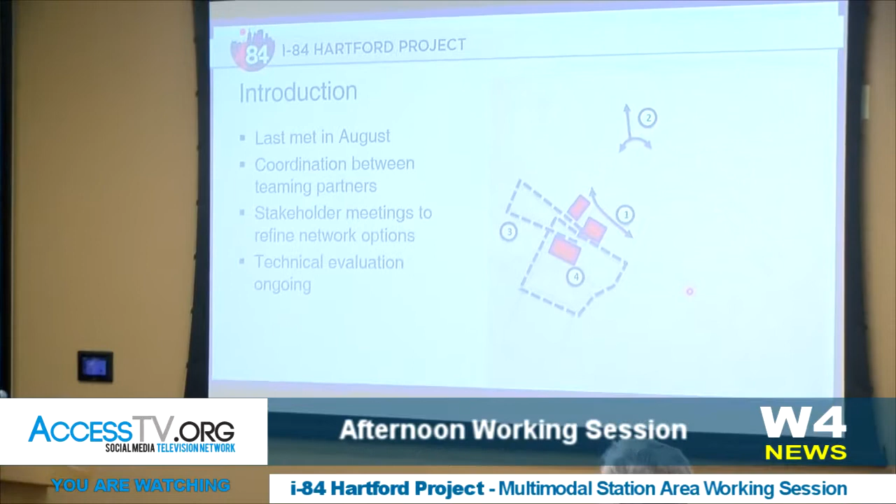Tom's going to tell you about these 4 focus areas in the network, and there's some broader urban design implications, but those red squares are also roughly where the stations are being targeted - a couple north of Asylum, 1 south of Asylum. And we're going to look at the pros and cons of those and how they relate to the overall street network, how they relate to the pedestrian experience, to the development opportunities moving forward.

So there's a lot of moving pieces, bear with us. In fact, many of the graphics you're going to see are still in very preliminary form. That's a result of this iterative nature of planning. But you're kind of here looking over our shoulder at this point. We want to make sure we get it right before we really commit a lot of design work to the final plans.

So Tom and I are going to tag team a series of slides here as we talk about the road network in the eastern area of the project. What I've got up on the screen is what we found to be the best performing of those 3 interchange options as it relates to traffic operations and safety, both on I-84 and the local streets. So many of the things we talked about today, we've really focused on how to improve that, just to lay the groundwork for some of the future conversations.

I-84 is depicted along this path. This is the eastern area of our project area. So this is Broad Street here, Farmington Avenue, Asylum. The highway comes around here underneath High Street and Ann Streets, and this is kind of that depressed section that leads into the Hartford Tunnel in this area.

So the proposed lowered highway alternative would be relocated about 250 feet to the west. The existing highway would be about here, so it would be shifted just a little bit to the west to help address this horizontal curve here, which doesn't meet some of our modern design standards, and for a safety improvement as well as for constructability.

And then as part of that lowered highway alternative, you see this red line work here illustrates the relocated railroad. So today the railroad comes underneath I-84, wraps around Bushnell Park. Union Station would be right about here, and then the railroad comes under I-84 again off to the north.

So this lowered highway alternative does rely on this relocation of the railroad to stay on this north or west side of the highway. And then this option calls for eastbound ramps that would come to a new street between Capitol Avenue and Asylum, and then westbound ramps to a realigned Cogswell Street. Today, Cogswell comes up here. We'd realign it here to connect in where Edwards is over towards Walnut.

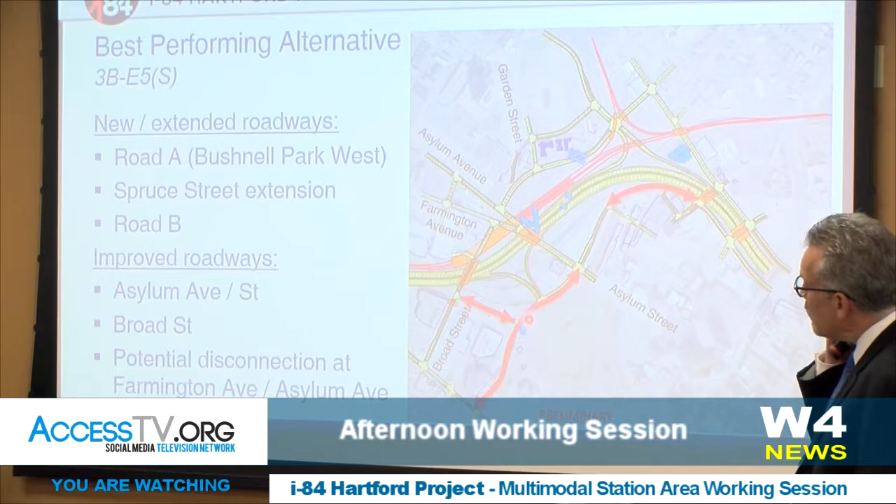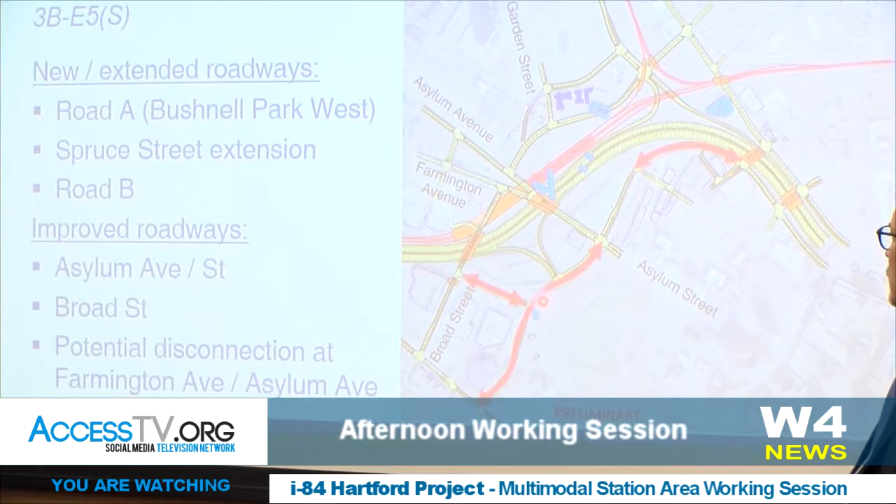So in addition to those new or extended roadways, we'd be looking at improvements to both Asylum and Broad Street. In all likelihood, the traffic operations will be improved, hopefully in a manner that we can create a more walkable, bikeable, and a better situation for transit users.

We do show with this option the disconnection of Broad Street between Farmington and Asylum. We've recognized over some recent meetings that that's a bit of a talking point, and we brought some options to the table that we'll discuss that keep that open. So that'll be something we talk about moving forward.

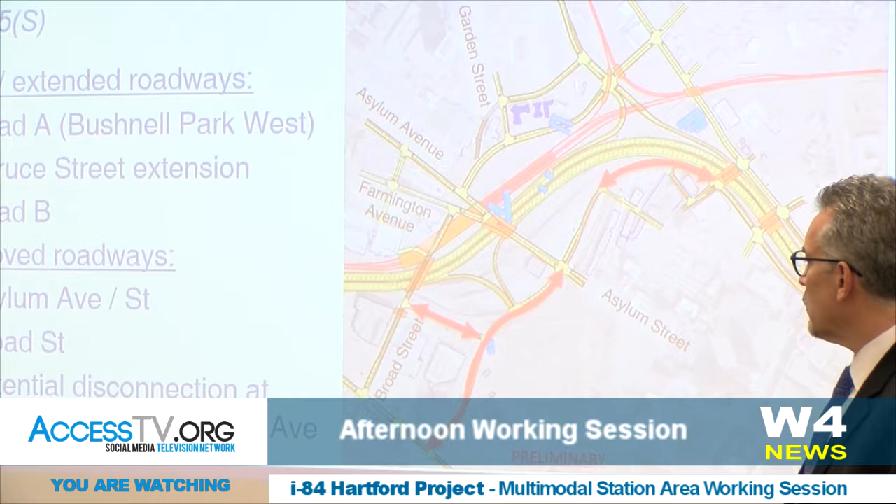So I'm going to turn it over to Tom to talk a little bit about his role here working with the city and what they've looked at doing to improve this alternative. So thank you, Casey.

One of the things that we're trying to do is balance the modification to I-84 with the connectivity of downtown and Asylum Hill, bringing together those two neighborhoods around this new piece, two new pieces, of infrastructure.

And as part of looking at the goals and objectives, and in talking with the city, we highlighted some of the objectives that we thought were extremely important. Obviously, the notion of trying to make improved connections, both east-west and north-south, and using those new connections to really establish a strong sense of place.

This is an area that sort of sits between two pieces of the city, and we want it to all feel like one connected city. So we need to create this great sense of place in this area.

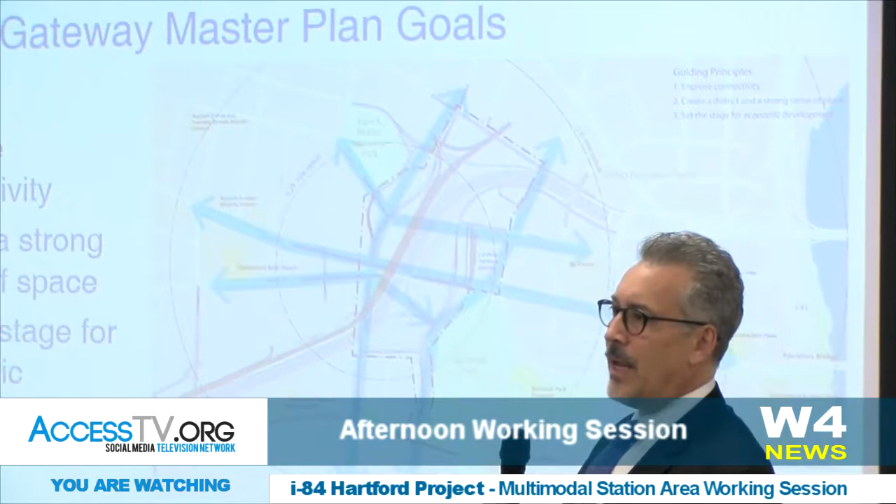As we bring these new pieces of infrastructure in, we need to build the community around it. And really, in so doing, create this opportunity to enhance and improve economic opportunity in the area, create places that can be seen as economic generators, again, building out the center of the city.

And so keeping those in mind, we've been working with the team to try to look at the preferred alternative that Casey just explained and begin to see how some of these opportunities illustrate themselves and can be incorporated into the design. So if you go to, actually I can go to the next slide.

So I want to walk through four focus areas. The first two are ones that we feel real strong about, that we've done a significant amount of work on and seen as improvements that really can be tied in to the preferred alternative. And the third and fourth are a little more open, still undergoing a lot of analysis, and certainly all four, we want your input, but that's kind of the stage we're at with all four of these.

So the first is this idea of a Garden Street connection. We've looked a lot at the area to the north of Asylum and how we might be able to bring in more connectivity in that area.

The second is really looking at the alignment where the off-ramps come in the north, and coming up with a way to push traffic in the right way through that condition. The third is looking at the Trident area, and a couple of options for how to move traffic through that area, given a lot of the community input we've received.

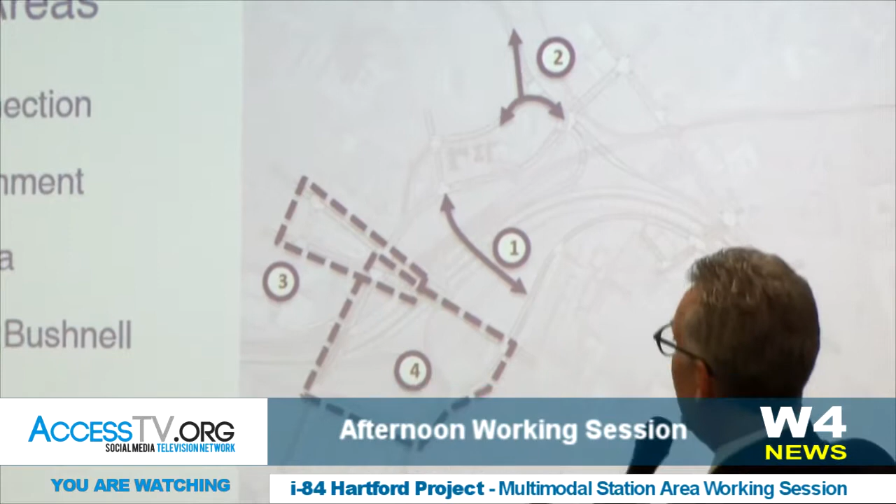And the fourth is focusing, like in the north, on what we call the South Quadrant, that area where we have Bushnell Park West Road coming in. How do we create that as a real active part of the city? How do we create that as a real entry point, a gateway, and also a great place around Bushnell Park?

So we're just going to walk through each of these one by one and talk through some of the improvements that we're considering.

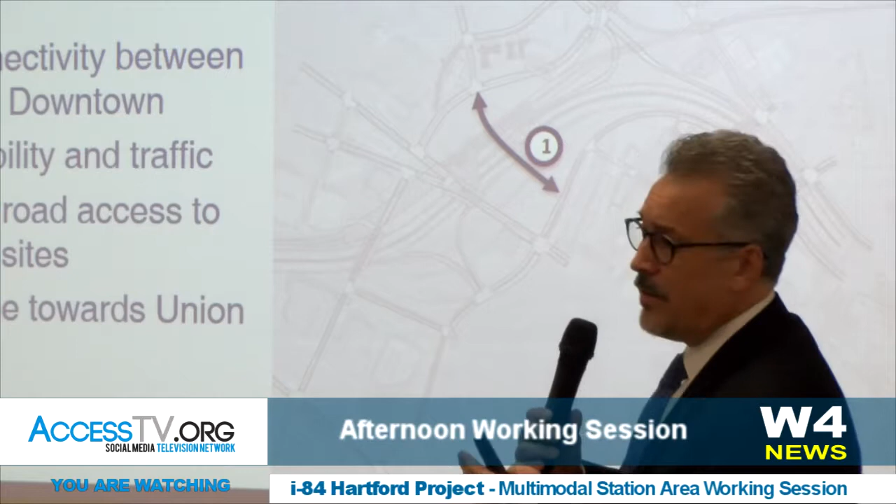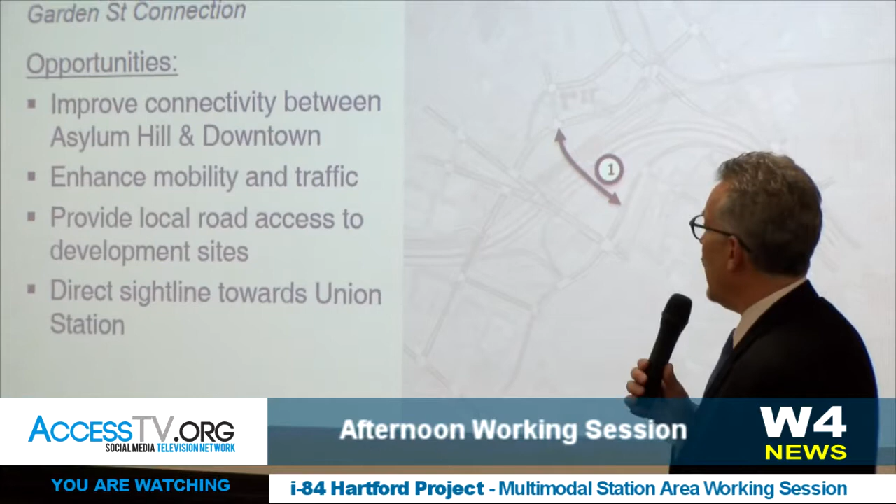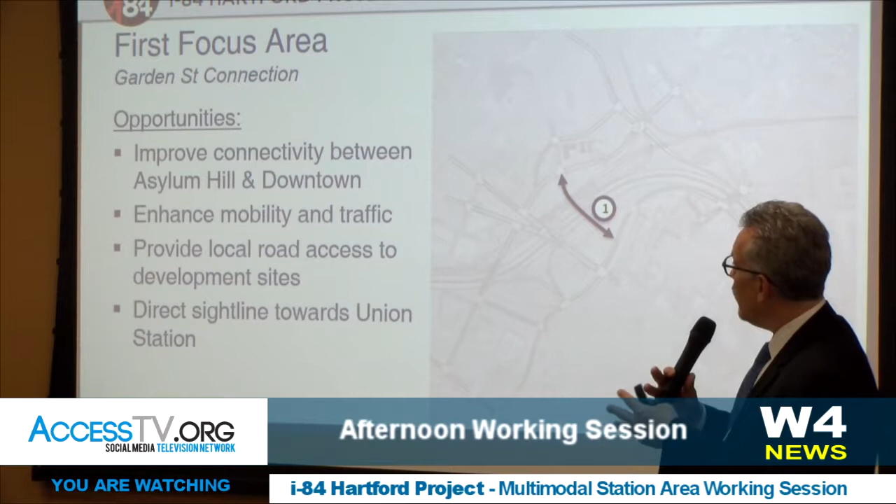First and foremost, this idea of connecting Asylum Hill back into the community on more streets than just Asylum Street downtown. Between Asylum and Walnut, there's really no east-west connection, and we wanted to figure out a way to do that. We think Garden Street is a real opportunity. It's a steep street, but it creates a great entry point directly into the current Union Station location. It sets up the ability to break the network into developable sites, increases sight lines, and we think it enhances mobility and traffic conditions.

And Casey, maybe you could talk through some of what we see in that regard. Absolutely, thanks Tom. First of all, it adds redundancy to the network, and what that does is allow us to alleviate some of the pinch points in the traffic network, particularly the struggles we see every day in the Trident area. This adds some redundancy and takes some people off Asylum and Farmington.

Now it's a relatively obvious east-west connection, but we're seeing benefits also from a north-south perspective. Somebody on Capitol Avenue could come north along that new Bushnell Park West, get to Asylum, and then use that as a way to get between Frog Hollow to the south and Asylum Hill to the north without having to pass through that really congested Trident area.

Now, Tom mentioned the potential grade, the steepness of the roadway. It is going up a hill. It would be about the same grade as Asylum Street is today, about 7%. That's just a little hair steeper than the existing Myrtle Street connection, which comes down under the highway today.

And then what we're looking at now is what that means for the ground in front of Union Station. In order to achieve that, we'd raise Spruce Street about 4 feet, right where my red dot is. We'd come down to meet where Asylum is today with no change, and meet where Church Street is with no change. So we're developing additional graphics to help illustrate that, and I'll be working with the State Historic Preservation Office as we look to document any potential visual impacts to the historic Union Station.

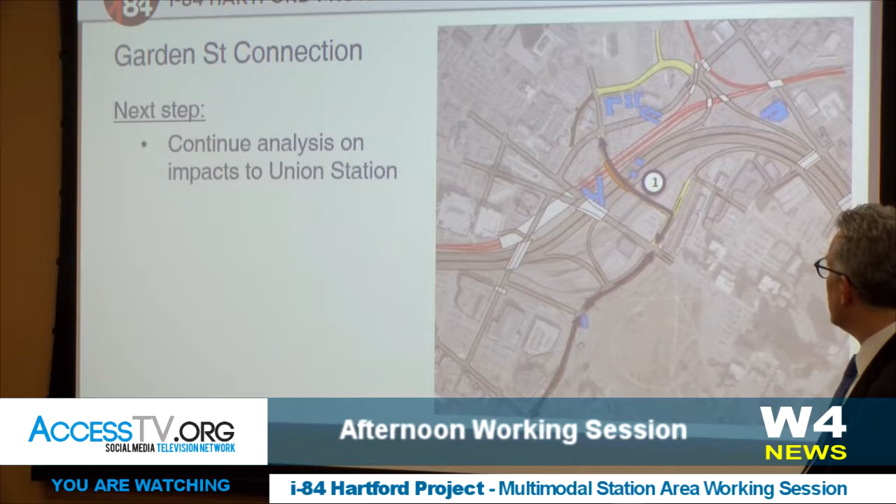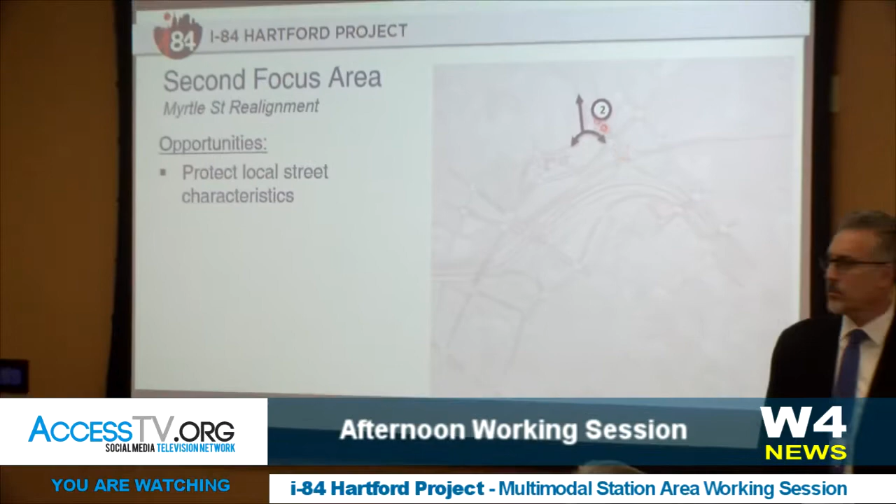And as Tom mentioned, that second focus area is up in the vicinity of Myrtle Street. Nick, can you pull up that map? It kind of doesn't show it on this map, but this alternative had led the ramp traffic up Fraser Place, which really leads you into a more residential neighborhood in Asylum Hill.

Now with a major destination on the other side of that, St. Francis Hospital, that was something some of the folks in the neighborhood were a little concerned about, and something we've looked at a few different ways to try and help mitigate.

And ultimately, we kind of stumbled across what we find to be a relatively simple solution, where instead of previously having Fraser Place come in straight to the ramps, we now take Myrtle Street and essentially wrap it around. So if you came off the ramps and went straight, you'd follow this curve around.

And ultimately, you'd take Myrtle Street to Garden Street, and Collins Street takes you up to St. Francis Hospital just off the page. That's a little bit more similar to traffic patterns that we have today, and it kind of keeps people out of those neighborhoods. This also helps traffic operations at this series of intersections, because it reduces the number of people who have to come off the ramps and turn left. So it's something we found to be a really positive introduction to this alternative.

And essentially these two things we're kind of viewing now as part of the alternative as we move forward. And then with that, Tom is going to talk about the first of those areas that's still a little bit up in the air.

Casey asked a quick question: would there be a traffic signal at the intersection of Fraser and Myrtle? The answer that Nick provided would be no. So the benefit is the traffic is just free flowing now as opposed to being forced up Fraser? Yeah, okay, thanks.

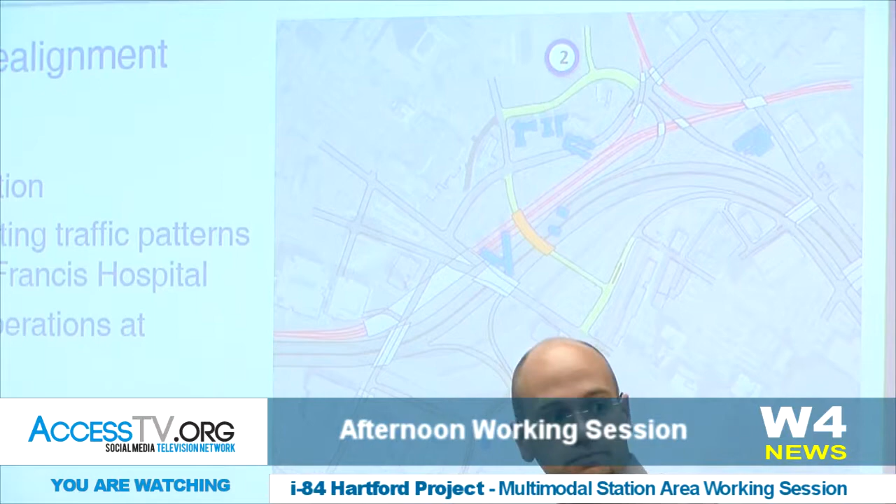So I think what I was leaning towards was turning you over to Tom to talk about the first of our areas where we're still really up in the air and contemplating several options. So we have another question.

Casey or Jackie asked: back up to the grades - you were going to talk about the grades, they're similar to what Asylum Street is? Yeah, that's right. In the winter, which is the only time grades really matter, there are times when buses cannot get up Asylum Street between Spruce Street and that hill there that goes under the highway. So why would you build another street with that kind of grade? I don't understand that. Sure - I mean, the truth of it is it's going up a hill. It has to start one place and get to a set elevation at the top.

We've played around with a couple different scenarios where if we make it a little less steep, we really have to pull the elevation of this roadway, which is Spruce Street in front of Union Station, up. So what we're trying to do is balance that. I wouldn't necessarily say it's set in stone the way we have it now. I certainly value the input of your comment. We thought that was kind of a fair balance because it set it equal with a neighboring city street, but it's something we can look at.

We could potentially make the grade a little bit less if we raise the elevation of Spruce Street right here in front of Union Station. So that's something we'll look at.

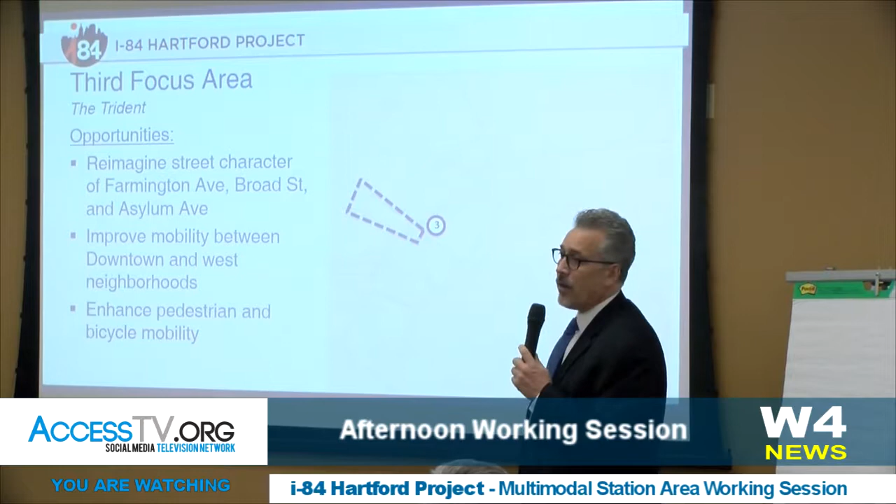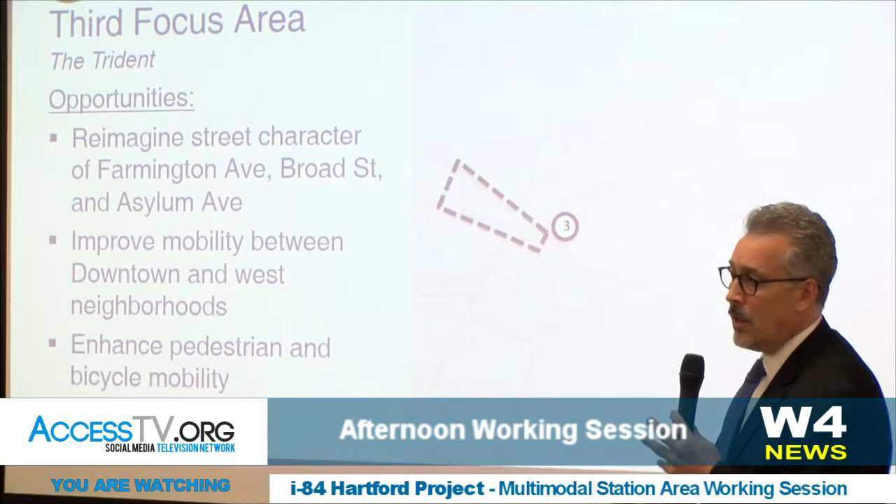Under the preferred scenario, the optimal manner for which to move traffic through the area found that if you separated Broad and Cogswell in this area, that was a way to move traffic through the neighborhood in the most efficient and optimal manner. But we have heard that there are a lot of concerns about bike and pedestrian connectivity in that area, that there's a real strong desire to have Cogswell and Broad connected. So what can we do to try to balance what really are a number of different trade-offs associated with this area and try to get this right?

So we went back to the drawing board and continued to look at the area. We obviously want to meet the goals we were shooting for of enhancing mobility, creating connectivity, generating a great sense of place. We also want to make sure we don't have any fatal flaws in the traffic network. We don't want queuing back onto the freeway. We don't want intersections that have a full cycle delay or more.

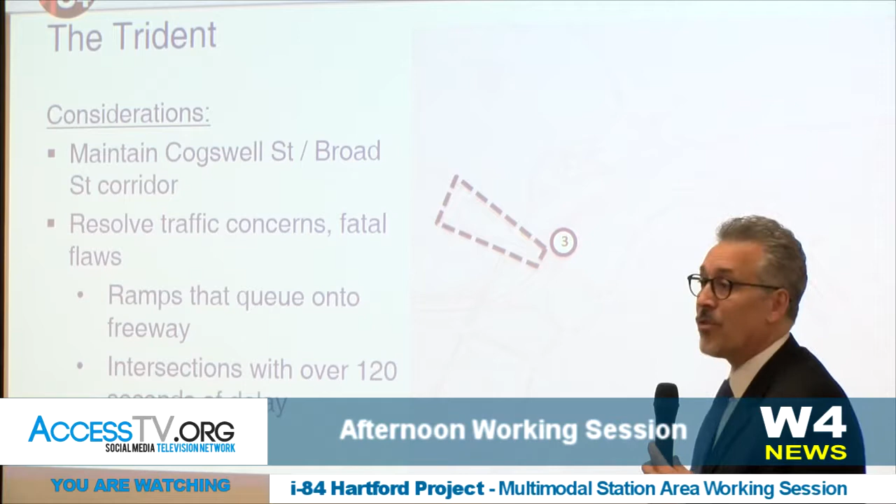Balancing those different options, we've really looked at 4 alternatives that we'd like to present today and get your reaction to. The first would be the original we presented last time, which is what we call discontinuous Broad Street. But we also want to look at maybe there's a way to not have Farmington extend directly into Asylum, but bring Farmington down to Broad. There's the idea of converting that whole section into a roundabout. And then a fourth, which we call the Western Shift, which I'll explain when we show you the drawings.

So this is the first, the discontinuous Broad Street. This was the one that became the preferred option because of the traffic performance, and it provided the best opportunity for keeping the streets around the Trident at a more pedestrian scale, less lanes to accommodate, easier to traverse, things of that nature. All very important to trying to create a balance between automobile and pedestrian in the area.

Yeah, thanks, Tom. So just to speak to that, we feel that does end up adding benefits also to the bicyclists, the pedestrians and the transit users in the area, and that the roadways feel a little bit less auto-dominated. One of the things I'd say too, I just enlarged this arrow here to demonstrate that we would look to keep a bicyclist and pedestrian connection through where Broad Street is today. So when we talk about it being discontinuous, that's really just for cars or buses.

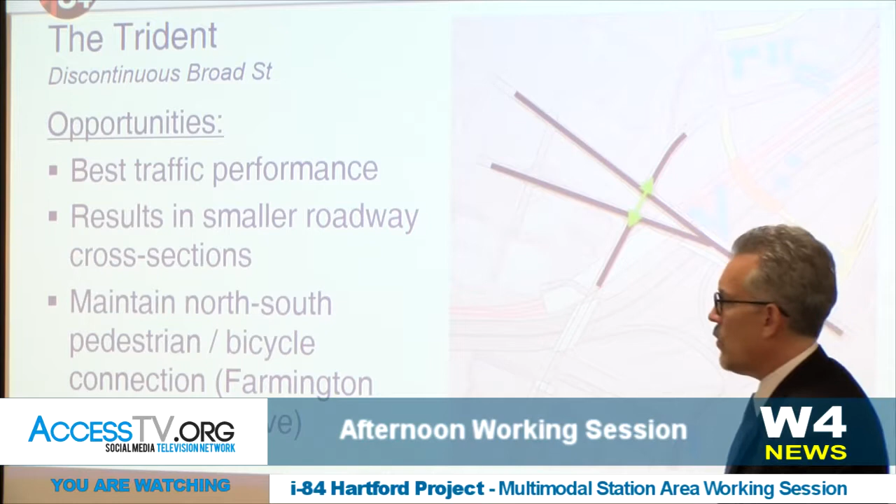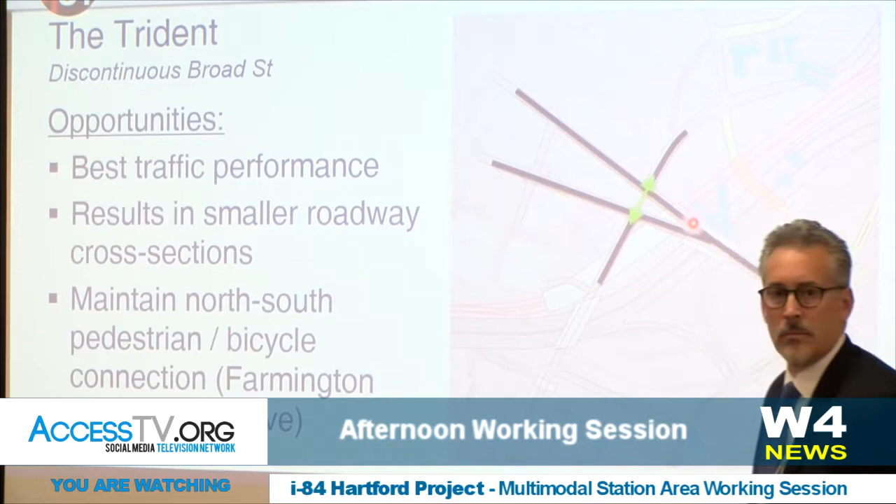Sure. One of the reasons the Trident set of intersections — we're talking about the intersection of Asylum and Cogswell, the intersection of Farmington and Broad, and where Asylum and Farmington come together — have so much trouble operating well is they're really just 3 intersections that are too close together, and there's a lot of traffic trying to come through both up Asylum and up Farmington to get in towards downtown, and then they're conflicting with a big movement of people today who use Broad Street north-south, not just between neighborhoods, but also to get to the on-ramp we have today on Broad Street. Now, one of the changes you'd see under this lowered highway alternative is by moving the eastbound on-ramp over towards Bushnell Park West, that does change those travel patterns somewhat, and it does reduce the demand to go north-south along Broad Street. So it's really just then left at that neighborhood level traffic.

When we were looking at all these different options, Nick and I have a far more detailed presentation if you're interested after, we could walk you through. One thing we tried here is we went out and counted cars, tracked where they went through the area, and noticed how few were really taking that north-south connection. That's what led us to try this. The results, we were even a little surprised at how well it operated. It's almost remarkable how much better it operates than many of the other options on the table.

There would still be intersections there with pedestrian signalization so that bikes and peds could cross efficiently, right? Absolutely, and there'd be full bicyclist and pedestrian mobility at each of these two intersections, as well as green arrows denoting movement between them on the parcel of land in between.

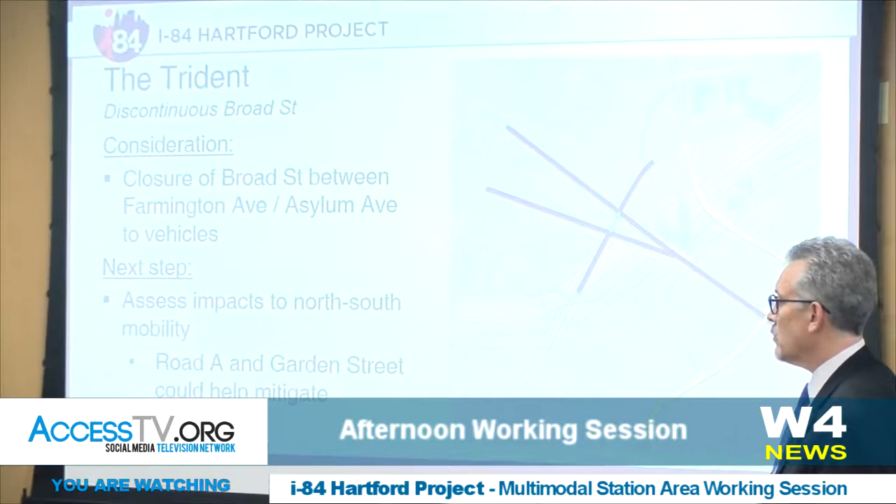So I can either pause here if there's any questions or comments, or I can - oh, here we go. I just want to confirm one thing: you're saying that the green arrows represent bike and pedestrian connection, but not cars. That's correct.

Just curious, since you've taken a look at that, do you know approximately how much longer that would be than what currently exists? It would depend slightly on where your origin on Capitol was and where east-west you were going, but the distance between Broad and this road here is about 1,000 feet. So if you had to come down to this road and then back up, it'd be about 2,000 feet - that's about half a mile.

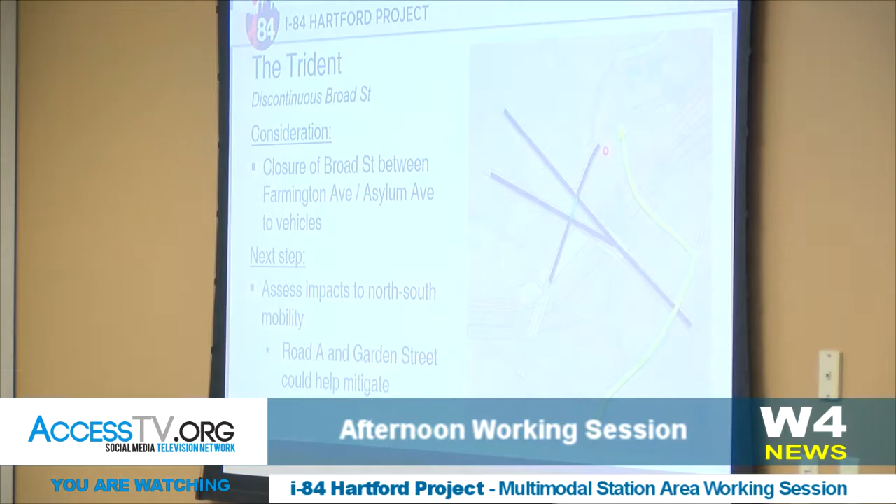Okay, but then of course, depending on how much faster it is. Yeah, we see it as probably being more efficient, these intersections operating more efficiently. Plus, if your destination was to the east, if you were over by the Bushnell or the Capitol, it could actually be shorter than having to go all the way to Broad - because remember, today there's no road here where this Bushnell Park West is shown.

Right. What about anybody headed west? Is there any other option other than Sigourney? It would be Sigourney, or you could take Broad Street up and then use Asylum Place around if you didn't want to go all the way over to that Bushnell Park West. Okay, thank you.

So you're saying that most of the cars that come down going east on Asylum and that would turn onto Broad Street - those are vehicles that are mainly going to get on the highway, is that? So for the cars coming down Asylum and then turning right on Broad - no, you're on Farm, that one - oh sorry, taking that right, they're going where generally? I'm going to let Nick answer that over there.

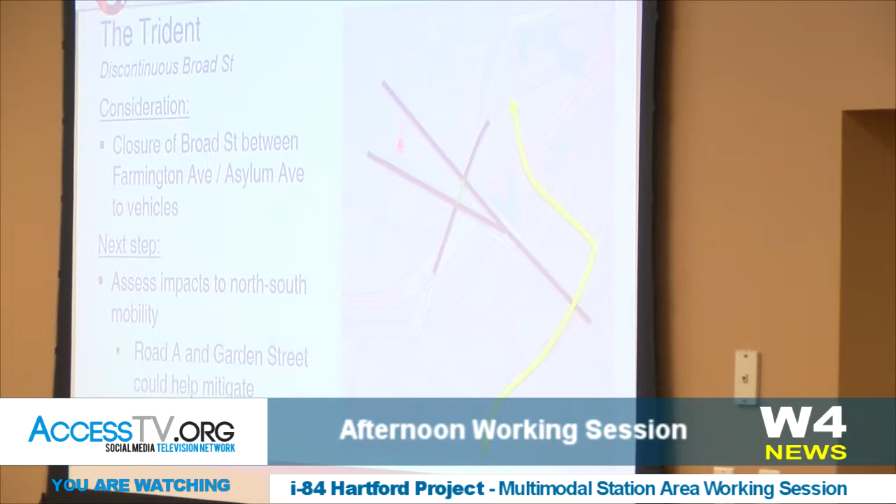Sure, in the PM peak we have a lot of them getting onto I-84 eastbound on the Broad Street on-ramp. But throughout the day we also have cars going down to Capitol, and it's not the major movement, but there's still a few hundred of them. They do have several more options in this case - for example, they could take Asylum Place right here, take a right and a left on Farmington and still go down Broad, or they could continue and take the new road, the Bushnell Park West or Road A. So they still have options, though it is a bit of a diversion from their normal route. Okay.

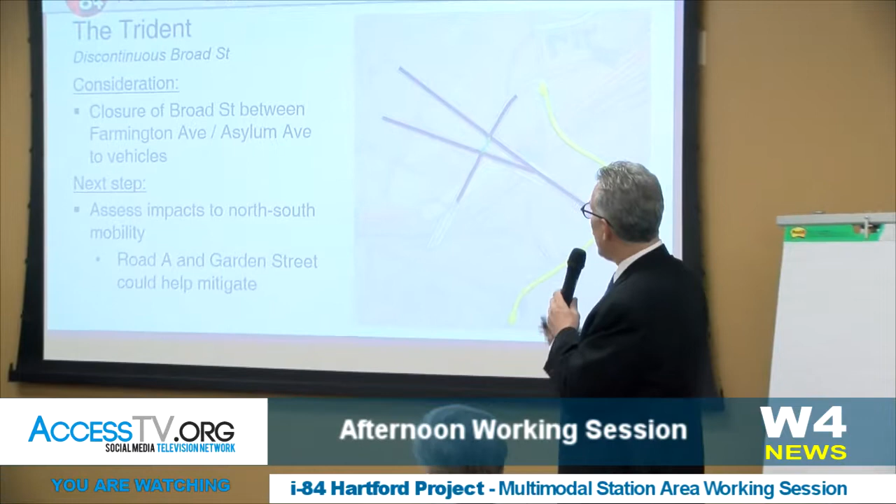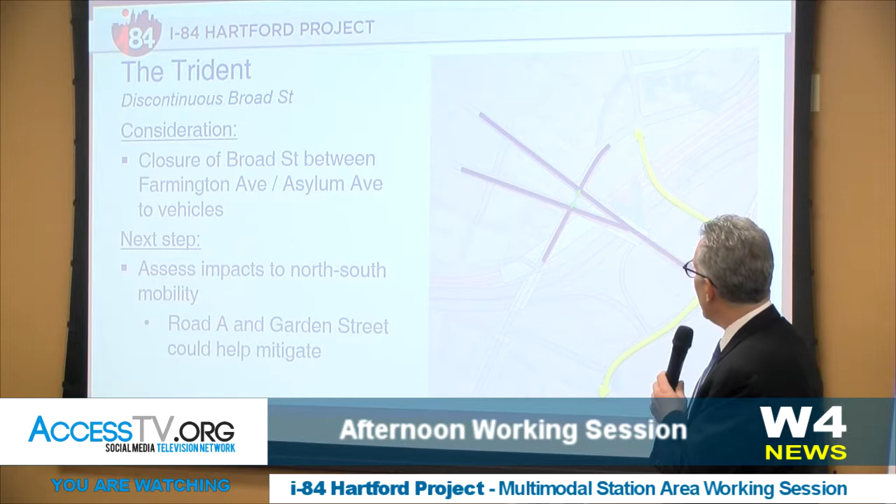Thinking about the Trident area, you can't really think about it in exclusion to the rest of the network. We're trying to think about ways to enhance and create as much mobility as possible, create opportunities for building out the network. One thing we found very intriguing was, if we really have an issue with those three intersections being so close together, is there a way we might realign the roadway network, create an extension of Farmington, bring it down to this new Bushnell Park West roadway corridor, and create something that solves our traffic considerations but also begins to build a network to the south.

That's compelling in a lot of ways, because it creates this featured development space right on Bushnell Park, one Farmington Avenue. It doesn't necessarily solve all the problems with the Trident, though. I think the idea is compelling, but we still have to think about whether we're achieving all the goals optimally with all the trade-offs, and whether there are other ways to build out this network that also make the Trident work effectively.

We have been looking very seriously at some way to consider extending Farmington to the south. To do that, one key issue would be sliding the ramping system further south to allow Farmington to come down and create the kind of block system that would work well. There are a lot of challenges associated with that from a traffic operations standpoint and a queuing standpoint, and we have to explore that more as we think about these connections to see if it can even work.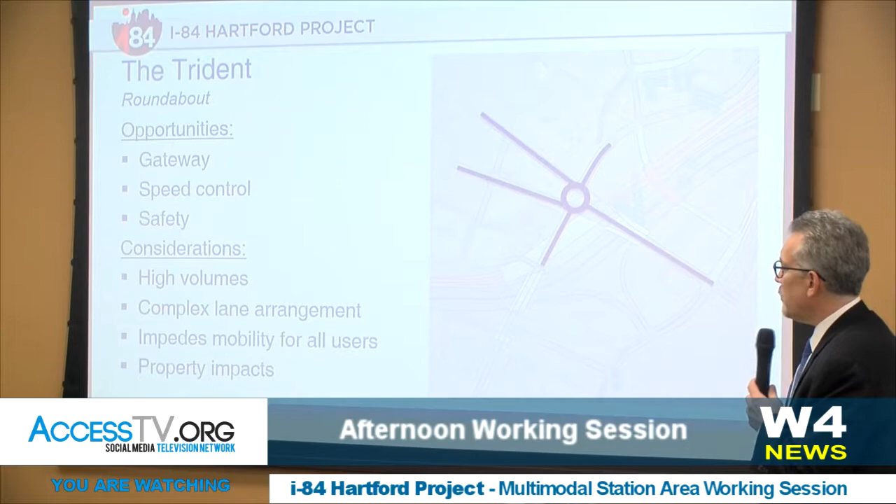Thanks, Tom. The question that came up earlier, and Nick's response, was a great one — how modern roundabouts have started to be used not just as a traffic operations measure, but as a way to be a gateway to a place. There have been studies showing safety reductions compared with signalized intersections, and they're definitely a potential speed control feature — you have to slow your vehicle down to traverse the roundabout. So we really did understand why people were asking if a roundabout would work at this series of intersections.

When we looked at introducing a single-lane traditional modern roundabout, we looked at the volumes, and they're about double the maximum a single-lane roundabout can hold. So when we tested that, it really just didn't work — it created congestion and backlog throughout the network.

So we then looked at whether we could add some lanes at key locations to make it work. We started doing that, and you're about to see the results — it kind of looks a little bit like some sort of sea creature.

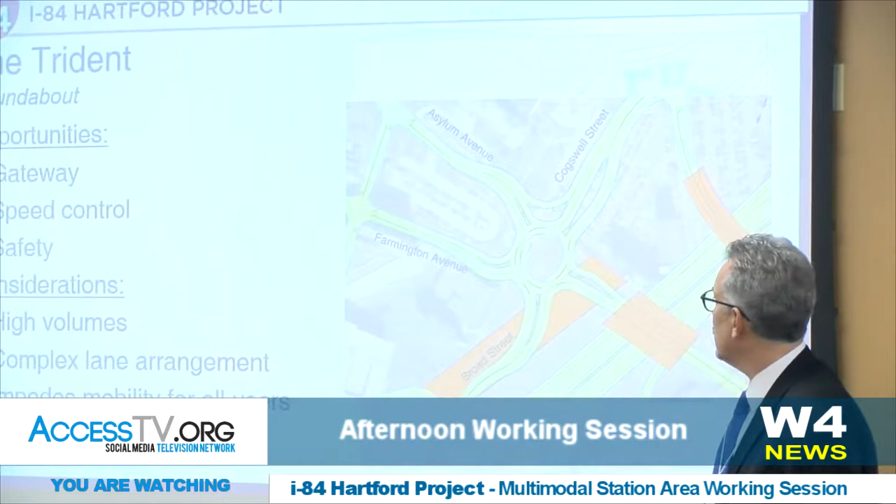It would be extremely complex. It's probably very hard looking at this top-down photo to understand how it would work and operate, and as a driver approaching this, it would be extremely complex as well. It would be very tough as a pedestrian to try and cross these approaches. The size would impact the 4F park areas on either side of Broad Street that it would expand into. So ultimately, we felt that this location is not the best in the project area for a roundabout, but we're going to continue investigating other intersections to see if they could be more appropriate locations for that.

This is kind of fortunate in a way, because the idea of creating a roundabout there had a lot of really good qualities associated with it, and it engendered a lot of creative thinking on the part of the team.

All right, so if this isn't working, what can we do? How can we try to fix that issue? How can we try to make the system work? We began to come up with this new concept, which I think is interesting and very compelling, to shift the intersection of Asylum and Farmington further west. And is there a possibility by shifting that west—there are implications associated with it that we have to go through.

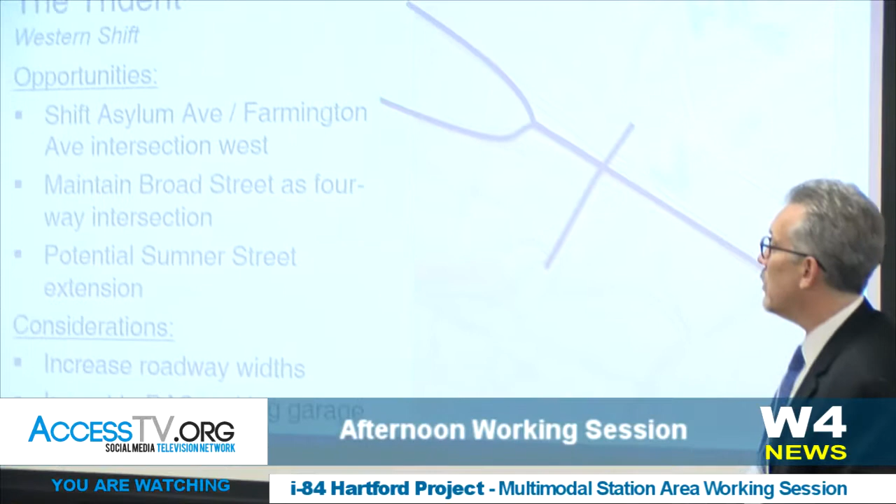Yeah, I just wanted to clarify. I said roundabouts create a safety reduction, which is in fact literally the opposite of what I meant to say—that they usually create crash reductions. So it's a good thing.

And Tom, just point out where the original intersection is on that and where the new intersection is, so it's clear to everybody. So my pointer's not as good as Casey's, so he may do a better job. But the current Asylum Farmington intersection is where Casey's pointer is right now, and what we're trying to do is shift it as far west as reasonably possible. It does impact the DAS parking garage, but it separates it from what would then be the potential for a connection across Broad and Cogswell. We know that people see that as a very important connection.

Can we create a scenario there where these two intersections work well? It's going to increase roadway widths in this area, but it's something that's worth exploring, and it does open up some possibilities for thinking about how that then impacts creating the network elsewhere. So this is something that was really brought about by the exchange we had at the last session with all of you, thinking: if we know these are the goals, how can we begin to achieve those goals in maybe some other creative ways?

One of the things that was our inspiration for this was the concept from a couple sessions ago, the discontinuous Broad Street, and seeing how well it worked when that V shape was created separate from a north-south movement. So what we've done is see how that played out. We did our preliminary traffic analysis. It does push a lot of traffic, once these two combine, through this intersection with Broad Street.

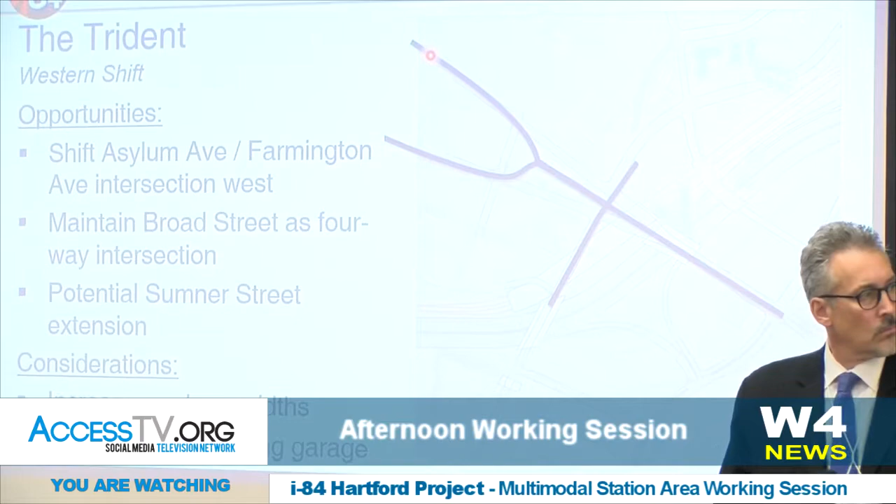The other thing we're looking at to try to mitigate for that is there's a missing roadway just off the page here—Nick, I don't know if you can pan to that too. So basically, Sumner Street comes down and does not extend all the way to Farmington. Understanding that would bring property impacts into play, we've looked at some scenarios to see whether that would help. There's the potential it could help us reduce the width we need on this critical segment, potentially to 6 lanes instead of 7, which would be a step in the right direction.

Hey Casey, forgive me, I'm over here. You're good. Let me be the one to ask the stupid question, because it looks to me like maybe we're just moving the trident to the west and we're going to have the same situation. Is that not the case, or why is this superior to where the current convergence of Farmington and Asylum comes in today? That's a good question, yeah.

So the reason to look at it is because it allows for the provision of this north-south connection. It keeps Broad Street continuous in the way that it is today. The traffic operations would be a little bit worse—they wouldn't be, at this point, what we've determined to be a fatal flaw according to the criteria we've set up, but they would operate a little bit worse. We'd be a little concerned about traffic queuing, just because there's so much traffic trying to move east, particularly during the afternoon peak period—worse conditions than our discontinuous Broad Street option, which is the first one we showed you. It would, in all likelihood, be slightly better than today.

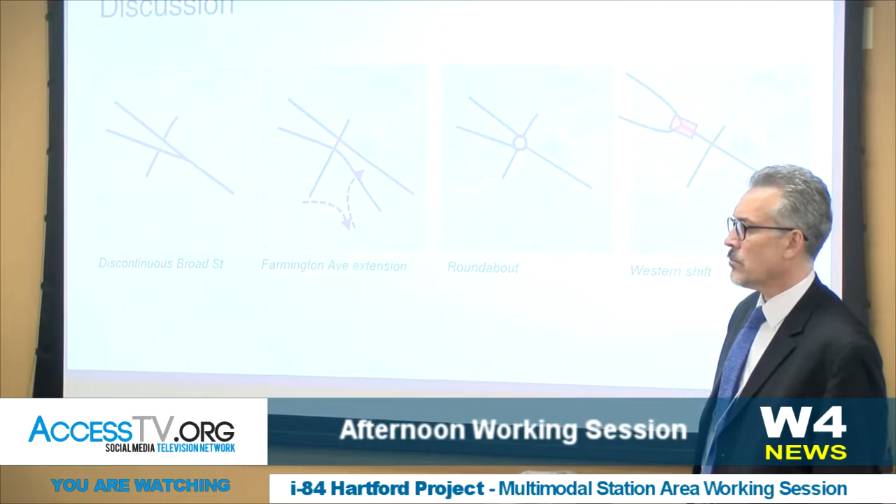Okay, well, we've got four basic options with permutations of each, and quite frankly there's a lot of trade-offs. We're still trying to understand what those trade-offs are. We aren't looking to necessarily choose a solution tonight, but we want to keep working on these and truly understand the pros and cons of each, so we encourage your continued feedback. In fact, after this session, we have much more detailed drawings of these — if anybody wants to stay and really get into the weeds with us, we'd be more than happy to do that. But just because we don't have this particular piece solved doesn't mean we should stop thinking about the broader implications of how to create better spaces in Hartford.

And remember, this is just sub-area 3 that we're looking at. There are many different ideas for sub-area 3, the Trident.

I want to advance the slide and get into sub-area 4, because there's a real opportunity here to look at what we can do around this interchange location, how to activate the space a little better, recognizing there are ramp structures coming up, and how to make better pedestrian streets, more human scale environments, and tee up development opportunities for the city of Hartford. The Trident and this area work hand in hand, and some things could potentially be advanced independent of whatever Trident concept moves forward. Tom, you want to take us through that?

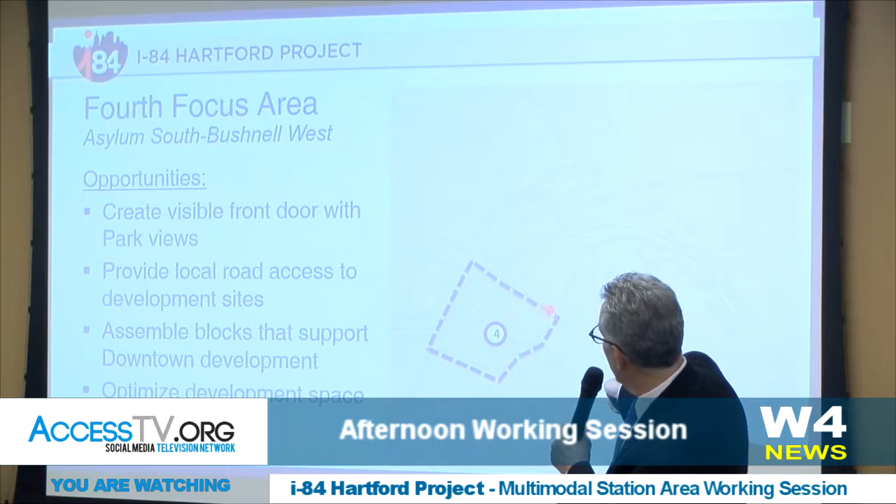Sure, I'll walk you through it, using my pointer. This is Broad on the north. This is Farmington and Asylum. This is Asylum. This is the new road being incorporated into the design as the ramps come off, and this is also a new road being brought in to connect in. This is the current off ramps down to Capitol.

What's exciting about this area is that a fair amount of what's being built here is new - the new ramps, the new roads. So we have an opportunity to design those roads in a way that makes them really special. One thing we want to take advantage of is the connectivity to Bushnell Park West. As we think about this neighborhood and know we're bringing in ramps here, what can we do to create this as a really great urban boulevard?

If you think about the possibilities of CTfastrak coming in on the east side of the rails versus the west, is there an opportunity to incorporate that in? So we see Bushnell Park West, which has been named more so by the community, as a real opportunity to create the beginning of a great space. But by itself it's a little disconnected. This is a very large area, and we want to make sure the area in the middle gets activated as well.

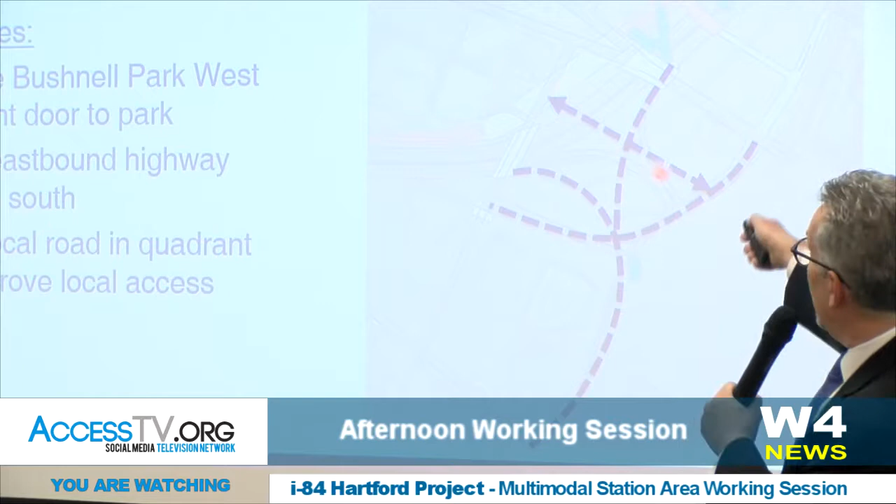The second part of our thought process is how can we bring the rampway into this neighborhood in such a way that we can facilitate some additional interior roads, like Garden, which is a local road. Can we create more interior network roads to help activate this space, both for pedestrians moving through it, but also to set it up so new development can happen in the area? We can create great open space and connectivity from the communities to the south and to the north, in a lot of different aspects.

Looking at the different conditions we've had with the Trident, we don't want to be beholden to any one condition as that continues to improve. What can we do in general in this area to make it work very effectively under any of those scenarios? Tom, really quick, can you back up to that? The gentleman over here had a question.

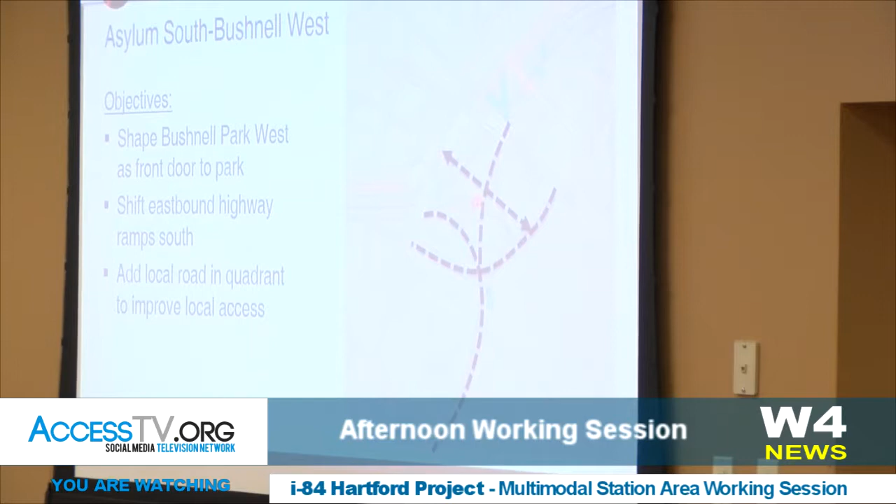I just thought maybe it's worth sharing with everyone else - these are a little washed out so it may be hard to see, but this alignment of I-84 is the proposed lowered alignment, not the existing one. Remember, the existing highway comes down a bit. I just want to make sure that's clear - we're looking at the proposed lowered alternative when talking about these new roads.

Absolutely. So again, I'm going to hold this further away - I must be reverberating, I'm sorry.

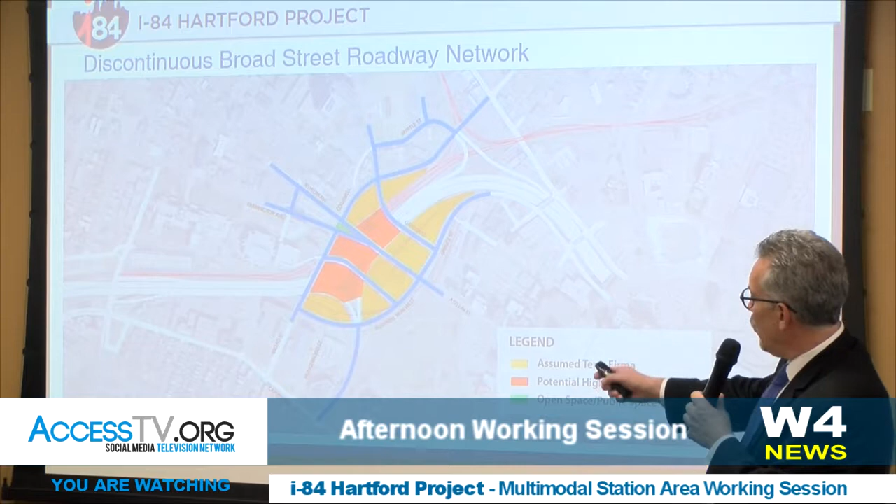Looking at the original preferred option you've seen before, even as we think about that option and the Trident in this configuration, is there an opportunity to extend a local road between Broad and Bushnell Park West? If we slide the ramps a little to the left, can we, like with Garden - not extending Farmington itself, since extending Farmington brings a fair amount of traffic into the mix and changes patterns - bring in an additional road that serves to create connectivity? Again, this road, similar to Garden, will be a pretty steep elevation to traverse the hillside, but there's opportunity to begin building in a grid associated with this.

It strikes me that you're doing this backwards.

Where the new intermodal transit center goes is going to dictate a lot of this. I agree, in my own view that is exactly where it should go, facing the park in a prominent, visible, high position, with the roadways around it serving transit functions. Some of the stuff you're talking about is just in the wrong place, or it just doesn't work, so why not solve that problem first? Then that affects all of these streets.

I also want to bring to your attention and remind you that we're also talking about a phased approach to the development of the station in most cases. Because of how the overall project is being staged, the tracks are going to be located first. So the tracks that are currently serving Union Station will be moved approximately 2,000 feet to the west.

Because of that, they will be built first and the rail station then will be built. The highway itself is going to be depressed, and that might not be built for several years later - 3, 4, 5, 7 years, that's still to be determined. So therefore any of the concepts that require an overbuild over the depressed highway will have to follow later.

So you're going to be building your rail station first, and then for the concepts where you have the overbuild on a cap, you'll be building that a few years later. So you'd have to have a temporary solution for how your buses and possibly your parking is laid out.

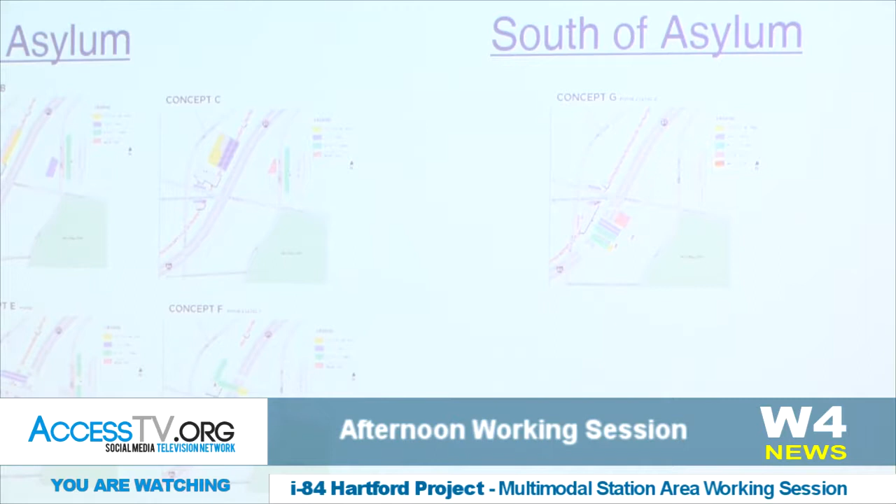So Gina, if I could just clarify, what we're talking about here is 6 options on the north, 1 on the south, and we've revised and simplified to 3 on the north and 2 on the south, right? Correct. And that's what we'll be presenting this afternoon? Correct, yes.

Okay. Were there any other questions about what Gina just said? There was a lot of technical content in that. What's the delay, the 3, 5, 6, 7 year delay in completing the roadway?

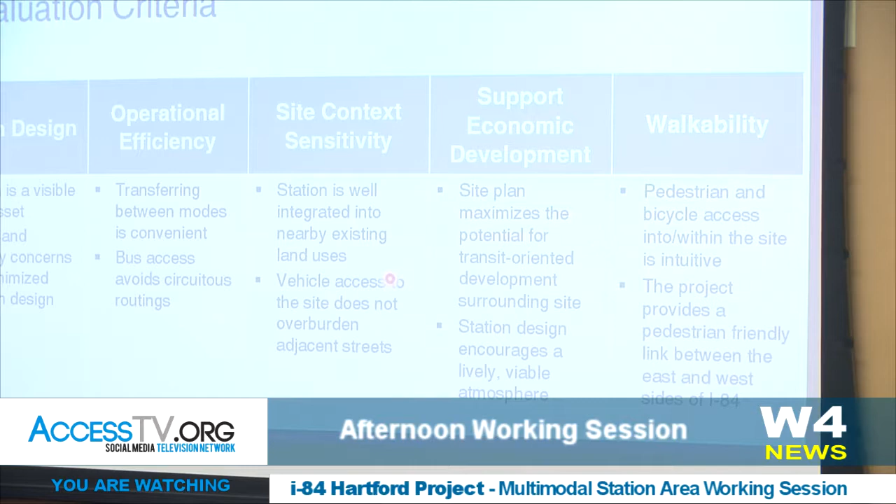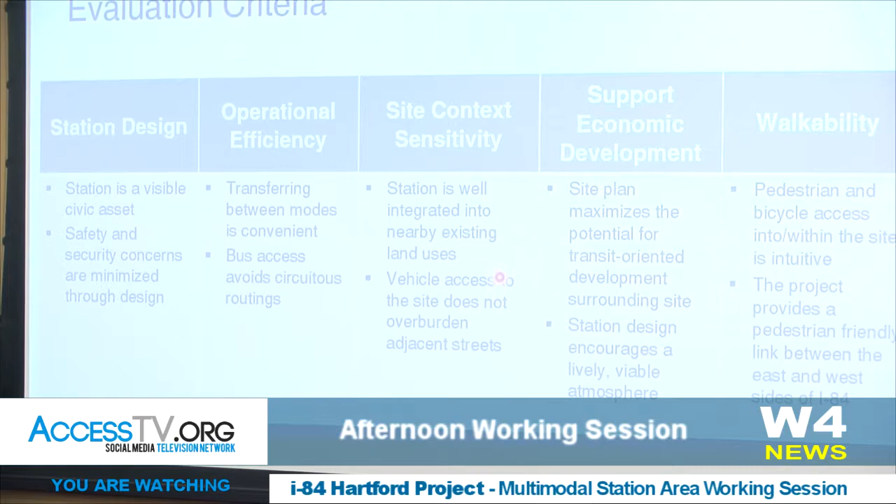All right, thank you, Casey. So going back to the slide prior, the evaluation criteria that we feel is really critical is concentrating on the station design, the operational efficiency, how it fits with the site, whether it supports economic development, and the walkability of the site. I don't know if either David or Bill want to describe that a little bit better on how a station should fit into the overall concept of the street network.

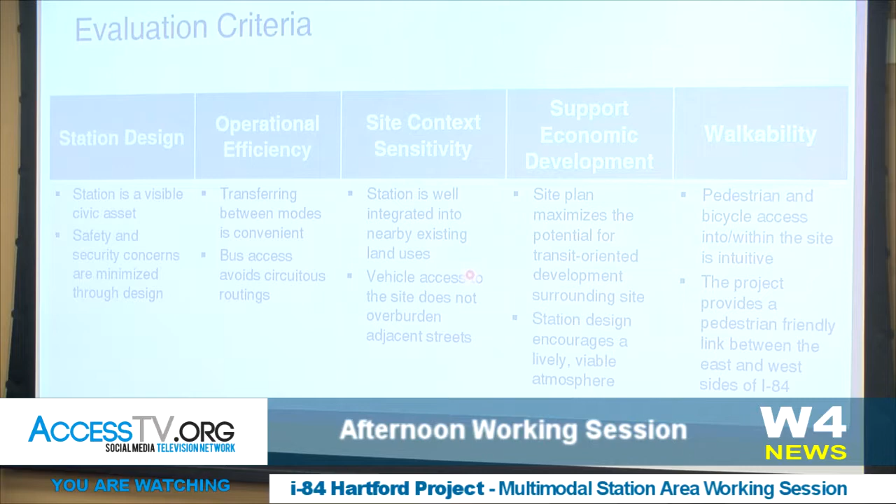Sure. So I don't have a lot to amplify, the core principles have been articulated here because I think we're hitting all the main points. But the real goal is that a transit hub should be part of the civic fabric of the city. It should have a civic presence. Most of the major rail and transit hubs in the world, if not the nation, always have a really great civic public space nearby as part of that ensemble. So it's really important to make sure that as you create the transit center, it has that relationship to the city as a front door and a gateway in and of itself, and also has a key public space around it that allows you to celebrate that facility within the city fabric as a civic building.

Thank you. So as we look at the evaluation criteria, we have a couple points under each one that we want you to think about as we go through each of the concepts. For the station design, we created these based on what we've heard from the public. The station should be a visible civic asset.

We've heard that a lot. It should also minimize safety and security concerns. So we want to make sure that where we build it and where we locate it, that it minimizes any issues with security in the future.

And this also has something to do with whether you build it over a depressed highway or not. We're still in discussions with Office of Homeland Security, the FRA, the FTA to identify whether or not there would be any issues with that.

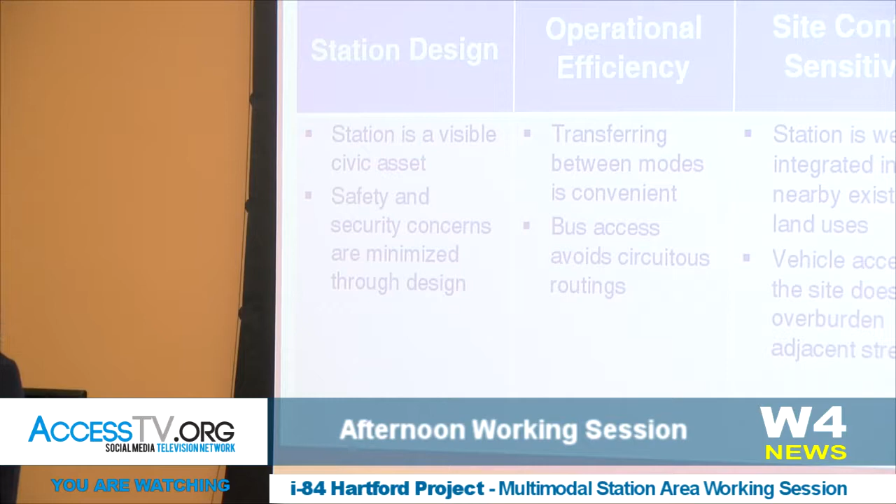In terms of operational efficiency, you want to make sure that you're transferring between the rail and the bus modes, that it's convenient, it's easy to transfer, that it's more of a multimodal type station footprint. You want to make sure that your buses are pulling into your site in an efficient manner. They're not circuitous, not going around the block several times before they can get into the station site. That's really important.

In terms of site sensitivity, you want to have it integrated into existing and future land uses. You want to make sure that the site plan supports economic development, that you're leaving enough land around the station and the bus area so that good economic development can be built there in the future.

And walkability, we've heard that a lot. Walkability, bikeability into the site, within the site, is very critical, very important.

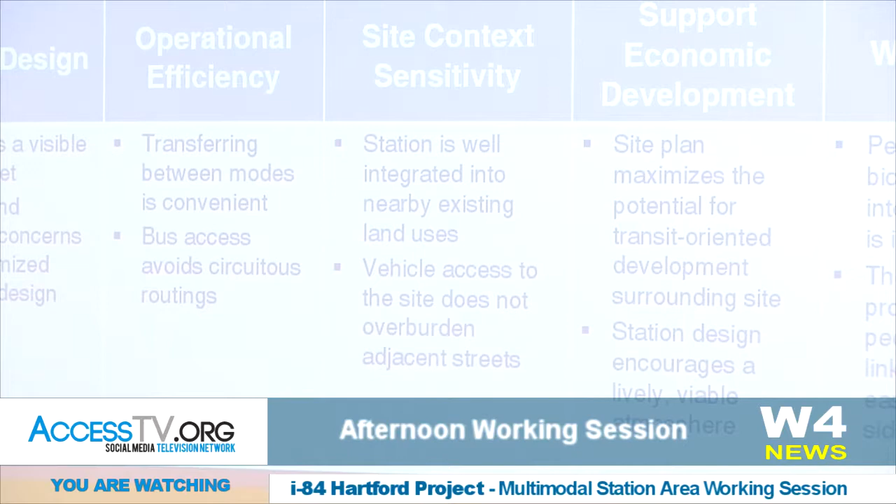So our first concept, and we've laid this out in kind of simplified graphics, just to show you, the purple that is right there in each of the site concepts represents the station. The orange is what we're considering a kiss and ride, a park and ride drop-off location, basically a drop-off location. The blue is the bus facility.

And that bus facility would be both the intercity buses, which are Greyhound and Peter Pan, as well as the local buses that CT Transit operates, and possibly some employer shuttles.

And in this scenario, we're also suggesting that there be a plaza along Asylum, so in front of the station. Now, whether that plaza is really an appropriate size, we don't know at this point, but maybe that would be a nice way to integrate the station into Asylum.

In this scenario, we're also suggesting that there be a separate but proximate bus station. And this layout was laid out with the assistance of the city's consultant as a way to maximize TOD development on the north side of Asylum.

This bus facility can move around. It could possibly be put over a cap on the north of Garden Street, just like the station to the south of Garden Street is going to be located on a cap, and that cap again is over the depressed highway. Would you like to enhance that conversation?

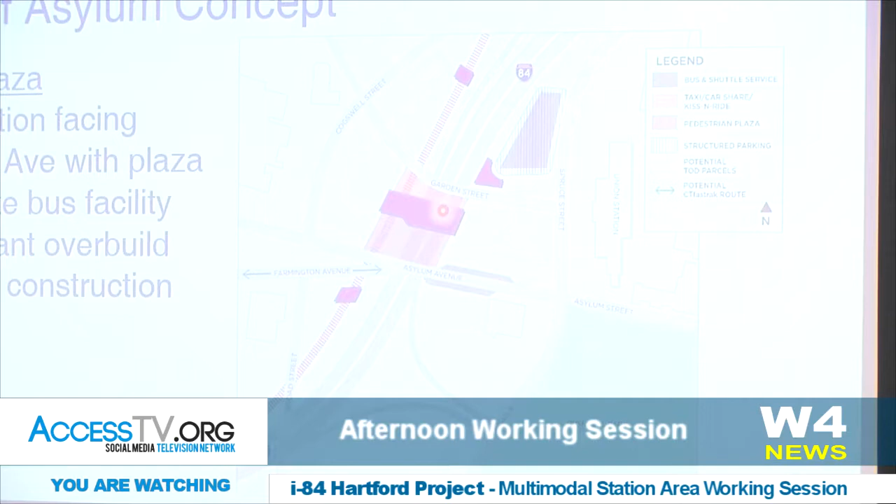I think, as Gina said, we've always talked about the visibility of the station on Asylum. That seems important. If you had a plaza here or something that set it up, I think the question would be, how big should that be? I think this one looks like it's about 100 feet. That, in my mind, might be pushing it a little bit too far back from the street.

So we'd lose the connection to the street and the iconic sense. From a transit-oriented development perspective, what I think we're trying to do in general is maximize the amount of space we have available for transit-oriented development. And I think about transit-oriented development as being pretty simple.

It's just about creating great spaces around transit. And that's not just good in terms of economic development. It creates a better station because there are people around the station, there are amenities around the station. It creates the station itself as a more attractive space.

So in this alternative, where we have the station over the highway, we're actually using land that probably isn't optimally suitable for development. Building over the highway does free up other land, which we wouldn't have if the station was located on that. As Gina said, we may not be able to do that. There may be security and other kinds of considerations that lead us in a different direction.

I also neglected to mention that what you're looking at is the street level view. There actually would be a level of the station below grade, so that the tracks and the platform are below grade, at the same grade as the highway. You could also have a concourse, so you'd be coming in off the train at the below grade level to come up to the street level, and that concourse could allow the rail and bus connection under Garden Street also. So as you're looking at these station concepts, just keep in mind that this is really just the street level we're showing you, and there would be a below grade.

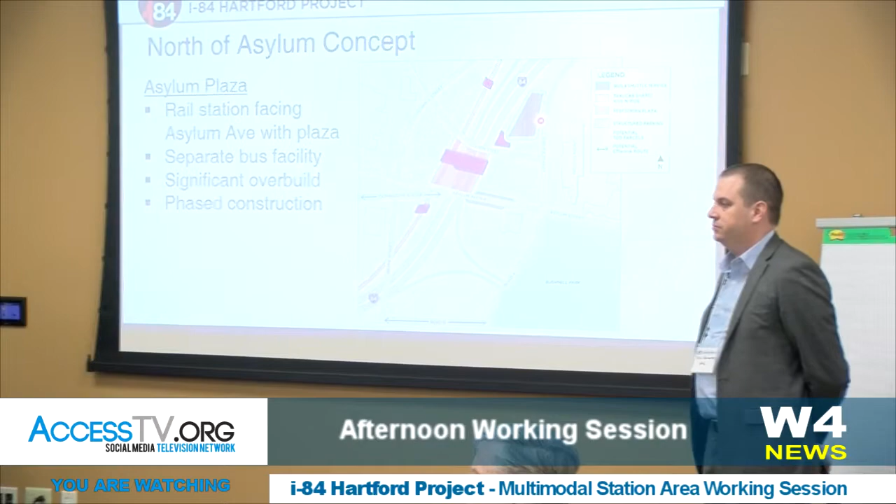Well, it seems to me, no matter what choice you use, the number one thing is to have support for economic development. Because if whatever we build doesn't facilitate further development, it's a waste of time and money. That space is dead space already. So to me, the most important thing is what design best will facilitate new economic development, and go from there. The city can't afford to have something that doesn't support economic development.

I think you said that one of the problems of building the station over the highway is that the highway is going to be built after the station, and that's a problem in several of these alternatives. Is it possible to build a temporary station that's not on the highway, and then after the highway is finished, build a permanent station in a better location on top of it? We actually have drawings that are a phased approach, and you're welcome to come up afterwards and look at our drawings, but that is exactly what would have to happen, yes.

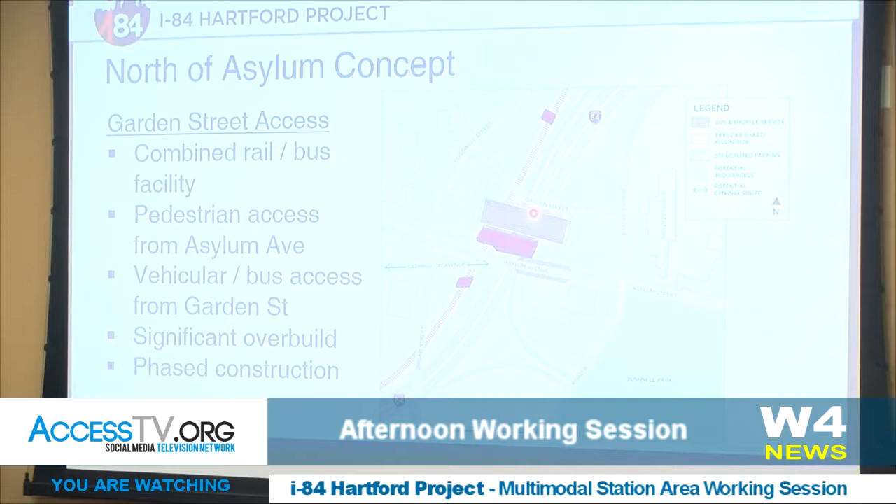Okay, so here's a variation on the north side alternative. In this case, the rail and bus facility would be combined, where the station, again in purple, the rail station and the bus facility is along Garden Street, so we're calling this the Garden Street access. You'd have drop-offs on the north side of that. Pedestrian access and the station would front Asylum Street. This again requires a significant overbuild and a phased construction. Maybe not as supportive, or takes up more room, for TOD.

One of the benefits of this scheme is that it frees up the parcel where you were looking at the previous scheme that had the bus station on the east side on Spruce, to allow for more of a coherent development to occur with the Union Station over time. So you get the bus footprint off of Spruce Street and allow that to become more of an address connecting into the existing Union Station complex.

I would almost also like to see a variation of this that turns the bus station north-south, sitting over the highway, so it frees up these flanking developments even more and gives more capacity adjacent to the train station, related to the overbuild issue and filling in the gap. But this one definitely tries to get more synergy and compactness between the two station components, to make them as focused on one area as much as possible.

Yeah, I would just add with this one, it does, as Bill just said, overcome some of the issues we had with the other one. We get bus and rail combined, and they wouldn't need to be literally in that configuration. We get clear pedestrian access on Asylum, the ability to deal with vehicles on Garden, the two are in the same place, and because the bus facility is taken off a site that otherwise could be used for transit-oriented development, we have a little more space for TOD. So there are a lot of good things going with this one.

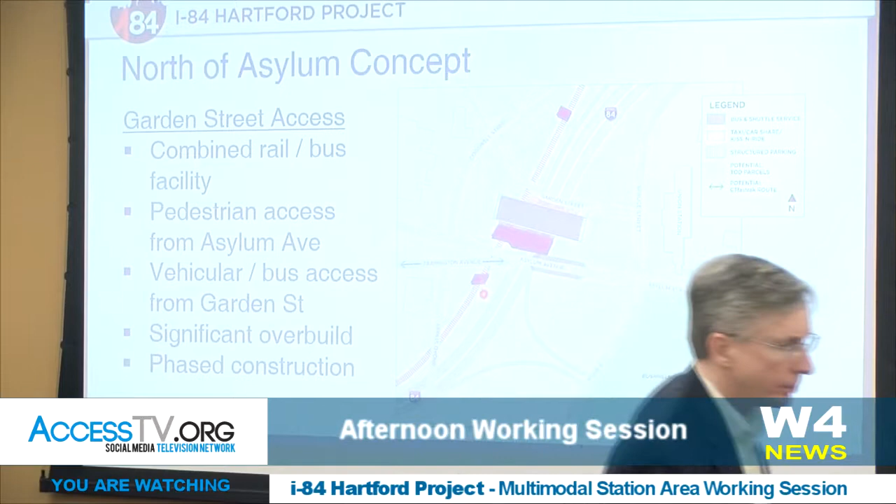So that little pink box that's south of Asylum, is it going to have an underground walkway to the station? That's a separate egress. There could be, right, Jim, if you want to.

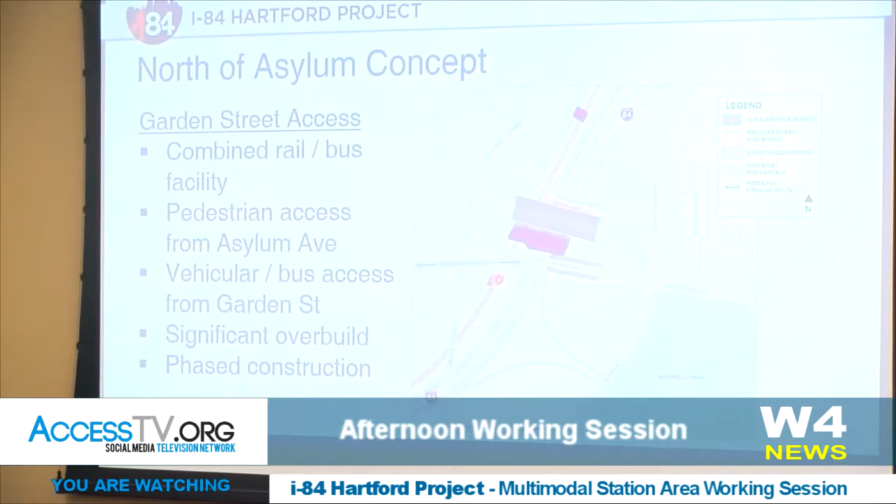Yeah, there'll be a concourse at the level below Asylum. There will be a pedestrian concourse to connect the station to the vertical egress points. And those are diagrammatic egress points at the ends of the platform, they basically mark the ends of the platform. That's what Amtrak says we need.

Okay, any other questions?

All right, so we developed a concept that requires no overbuild. Basically what that means, in order to construct a station that does not require a cap, does not require overbuilding over the highway or the tracks, we're suggesting that you could place a station just to the west of the tracks. That would be a rail station with some drop-off. The drop-off would have to be connected, it is connected, if you can see that, to Garden Street, so their access for drop-offs would be off of Cogswell to Garden or Spruce to Garden. And then the bus facility could be laid out either on top of the cap north of Garden, like we were just discussing, or in this location with TOD integrated into it, as well as the structured parking.

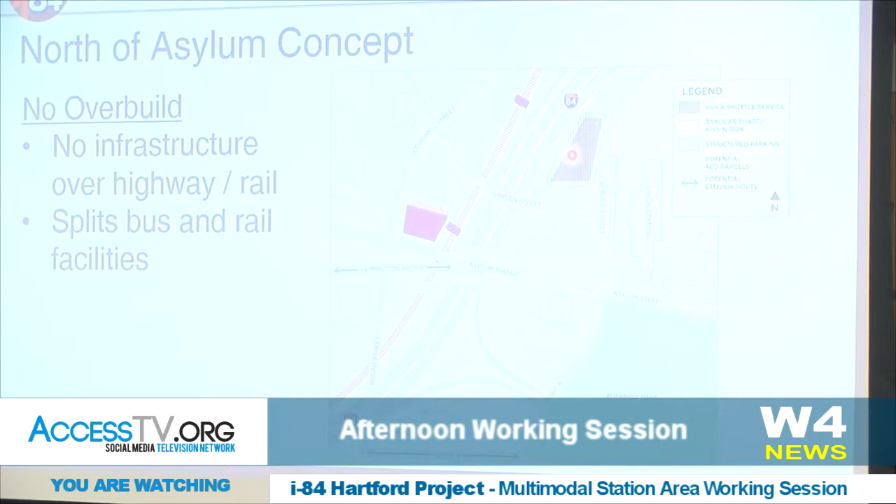And I see that strikes me as a less than ideal distance between the two facilities. Is that true? It doesn't have the multimodal feel or multimodal approach, correct. If you moved the bus a little bit closer, that could be helpful, but there would be some issues with separating those uses, I would think, from our objective.

In this particular alternative, if the station were built in that location, doesn't it then free up the space south of Asylum over the ramps for new development, for the new TOD, which is likely to be relatively tall, right? So that this iconic station couldn't be seen from many places. That's one of the problems with any of the locations on the north side of Asylum, the station is likely to be hemmed in by new development and tall buildings, and it can't very well be an iconic building if you can't see it, which is one of the principal reasons that I favor a location on the south side of Asylum where it can address the park. Maybe there'd be some new development there, but not a lot, and it would be visible all the way across the park. Okay, thank you, and we're getting there.

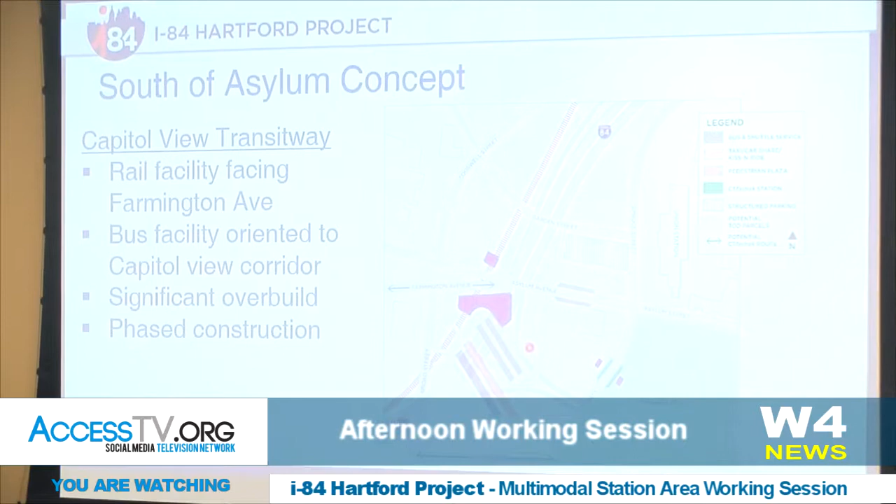South of Asylum concept - this is the concept introduced after our last meeting. We're calling it Capitol View Transitway. The rail facility faces Farmington Avenue, again shown in purple. You have the bus facilities oriented to this transitway concept so that you get this Capitol View corridor.

This would require an overbuild and a phased construction. It does allow better access to CTfastrak coming in on the south side - Road B, a new road coming up through Road A, and then access on and off of Broad Street. Do you have any comments?

So like the alternatives we looked at on the north, one benefit is that station and bus are largely connected. They're largely located over the existing highway right-of-way, and therefore most of the better parcels suited for transit-oriented economic development remain free for that purpose.

One important thing about this one - from the previous presentation, almost all the complexity and moving parts are on this block between Broad and Asylum, Bushnell Park West, and Road B. So some versions of this alternative become far more difficult with certain concepts for the extension of Farmington. There's a great degree of interconnectivity between which options we land on for street infrastructure and how a concept would work in this location.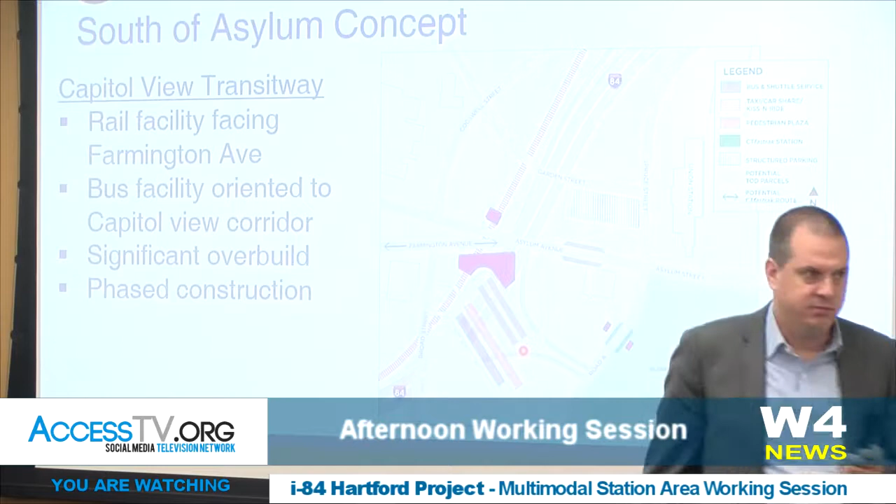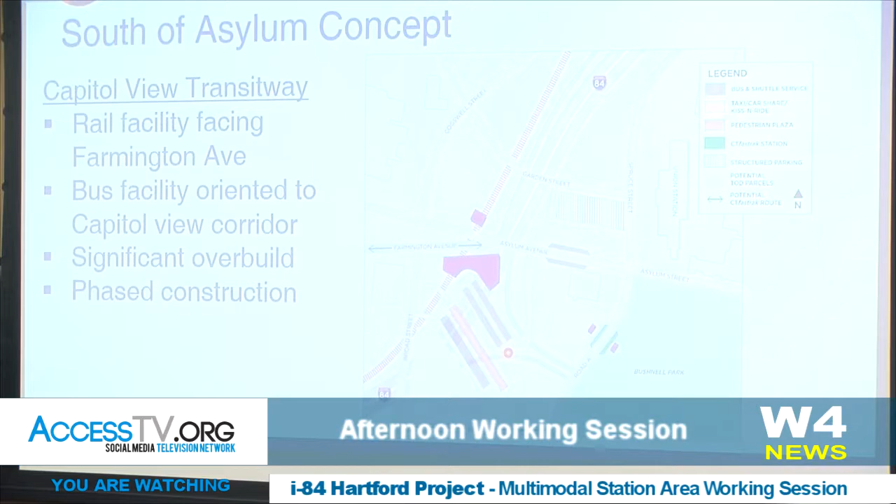Could I add one more point, Bill? It's about the character of Broad Street. We've had a tremendous amount of focus on the quality of Asylum Street, but as we go through this process, we shouldn't forget Broad. Broad is clearly a terrible street today, but it could be so much better in the future as a pedestrian and bike street. One concern I have, even more on the second option, is how much bus infrastructure ends up on Broad. We've probably got 500 feet of Broad Street looking at bus operations access. That could be mitigated, but it's an important consideration that as we look for improvements in Asylum, we keep focusing on the quality of Broad as an important pedestrian connection between neighborhoods.

We have a question over here.

I have a question about pedestrians. This one only has one bigger pink block for egress. Are those two other little ones by the CTfastrak on the right? Those are the station - that's a CTfastrak station, so they're not egress points. So this one only has the one. Oh, there could be another one up here. Okay, thank you.

The question was, why is it such a strangely shaped station? Jim, that's a very good question - the next one's strange too, I agree with you completely. We're really having difficulty nailing down the actual program of this building. We're getting a lot of different numbers from some of the entities that will be in the building, and so the size of that is probably larger than it really needs to be.

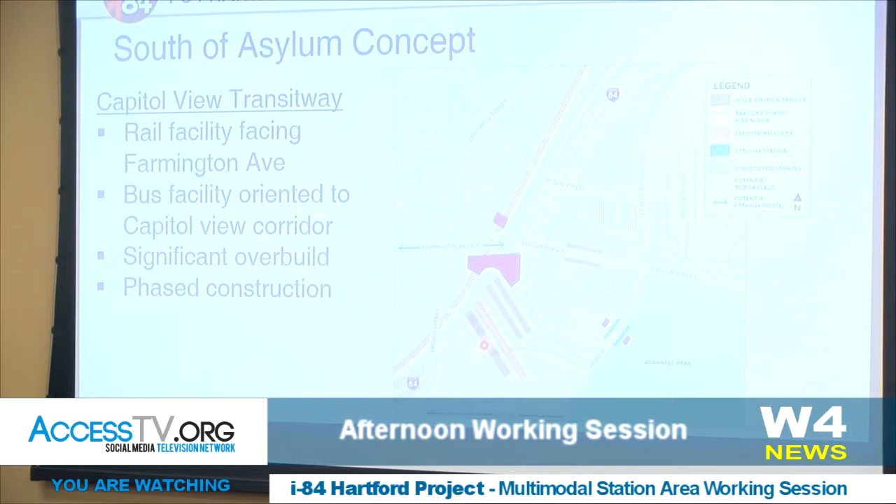No, I think the bus functions are off to the side of this boulevard. I'm envisioning being down in the lower right-hand corner looking up, and it looks like the bus stations are oriented towards Capitol Avenue on the angle, so they're between the train station and the park. Correct. So what would the grades be - would they be depressed, lower? The hope would be that there'd be some sort of large transit-oriented development here, so the view would be up the boulevard and not of this function.

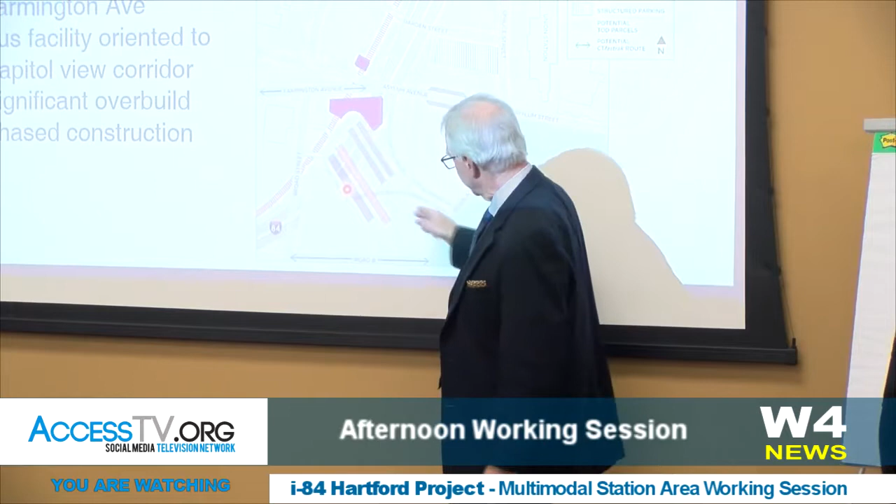The hope would be that there would be a development here that would block any views into the internal parts of the block, and the station would be elevated higher up.

So then the view from the park would be resting on the hope that we would have transit-oriented development to shield us from viewing primarily a bus station.

I think the train station is a great opportunity for iconic and beautiful design. I've yet to see bus stations that have achieved that objective, but I leave that to your challenge.

Thank you. Any other comments? Go ahead. Did you have something to add or not? Oh.

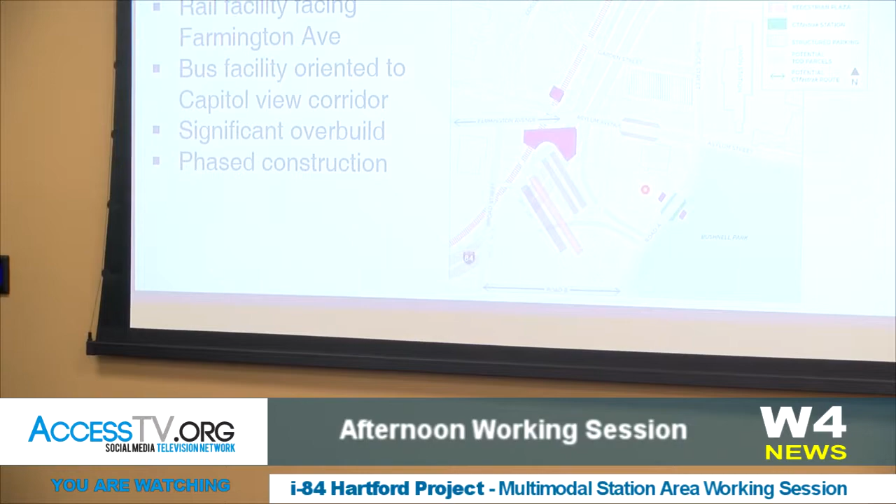So the question is, should we be thinking of any of these designs as being more or less economical? I look at the no overbuild and it looks like the cheap-out proposal. Is it? I would think that would be the case, yes.

We haven't costed these out, we're not there yet, but I think anything that requires the overbuild would be more costly than the options that don't require the overbuild.

But I would also add that there's more economic return depending on who owns the land if you're developing instead of building transit centers on the dirt. It's easier to build on dirt no matter what you're building, but the opportunity to build with public projects on top of the overbuilds means they could actually all happen, as opposed to private development over the highway, because of the nature of having to phase and construct and design that in a way that's integrated.

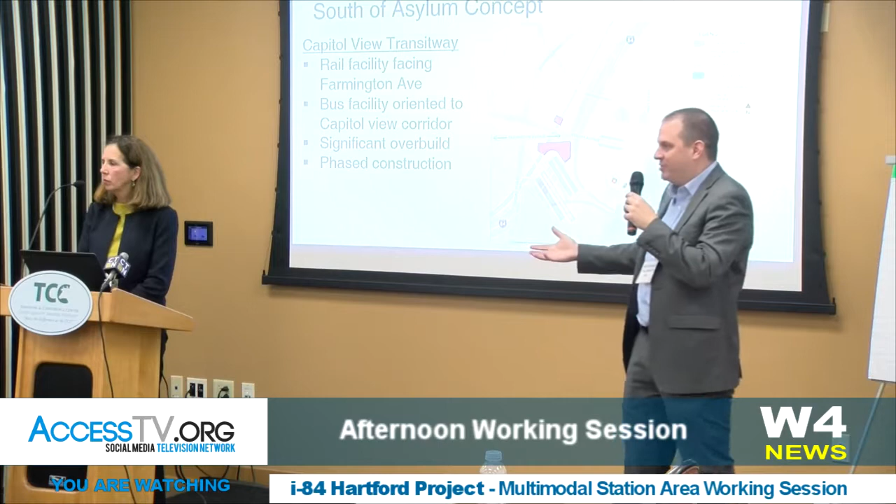Take Heaven on top of I-84, for instance, that office project that was never built that ended up being a skate park. You need public projects to be able to execute on top of those overbuilds for the most part, if they're ever going to happen.

And the other question clearly is how much overbuild you have. There are lots of examples of very compact train station footprints, essentially waiting area and concession areas, not a lot of overbuild space.

If you contrast that with the level of overbuild required to accommodate a full bus station, bus bays, parking, other pieces, more overbuild is likely to add more cost. Less overbuild, less cost. There are some functions that could work quite well in a compact overbuild, and there are other ones that just require a lot of space and would add a lot of cost.

What might be just a minor point: when you get a building with a big curve, isn't that a lot more expensive and complicated, and also kind of wasted space, because normally you get square rooms and so forth, as opposed to curvy, more decorative things with pointy little nooks that don't do anything?

That would be the architect's answer. Yeah, these are very diagrammatic, so we're not anywhere near that level of detail yet.

And actually our exercise for this phase of the project is really just to site the station and identify a location for the station. It's not to do any building design, but that's something for long-term consideration. But then is that going to be iconic, or - that's the other part of that, so.

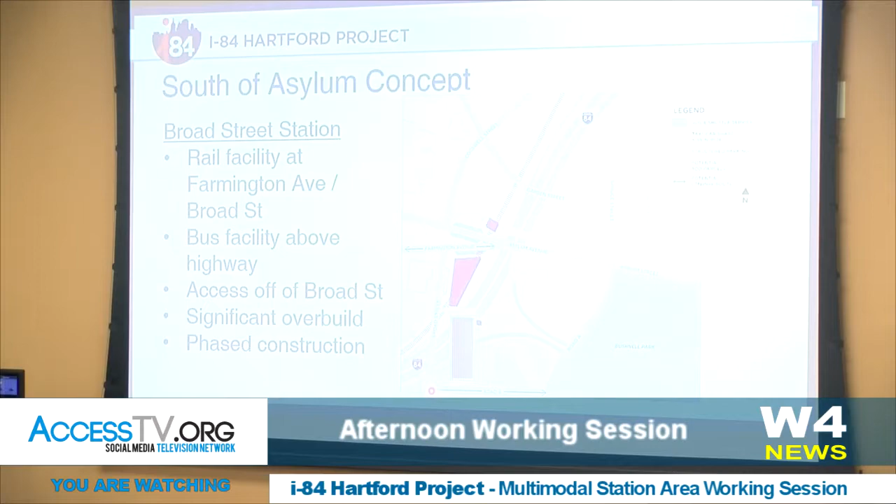When you're looking at some of these options that are south of Farmington and along Broad, how are you proposing to manage the chaos on the other side of the street? There's an entrance to an Aetna parking garage, as well as the YW parking space. I think there's 3 streets right in a row there, and it could be really confusing or challenging if we've got a whole lot of traffic going in and out on the other side as well.

So in this area is where you're talking about? Yeah. That would be more of a Nick question. But I don't know if Nick, if you want to respond to any of that for the traffic aspects.

One thing to keep in mind is Broad Street will be a much less busy street than it is today if we cut out that section between Farmington and Asylum. And even if we don't, it doesn't have that on-ramp there anymore, so it cuts down on the traffic volume. Of course, having closely spaced driveways is always a concern—it's something we don't really do these days when building new roads. We try to keep driveways consolidated as much as possible. This could be an opportunity, for example, if we're having a major driveway for the train station or bus station, to put a traffic signal there and consolidate those driveways with it. So there are different options, but essentially what we call access management is the main principle behind it.

Right, and the CTfastrak alternatives are still being studied. For the two south concepts, we're showing CT Fast Track serving the station coming in on the new Road B and going up on Road A. On the north side concepts, we're suggesting CT Fast Track operates like it does now along Asylum once it leaves the dedicated right-of-way. So both the north and south side of Asylum would accommodate CT Fast Track, just in different manners. That's a good point, Sandy, thank you.

So we've heard some pros and cons on each of these station concepts. Does anybody have a preference? A lot of the layouts can be mixed and matched—instead of laying it out east-west, we could lay it out north-south for the bus bays. Just overall feelings: north side or south side of Asylum? Any particular layout you like better than others and why? Any general discussion on overall access issues you're concerned about for one concept over another?

Well, I have a very strong preference for the south side of Asylum. Possibly two, Broad Street Station would be the best one. I favor it being on that grassy corner at the current intersection of Broad and Farmington, which is the former location of Hartford Public High School. Being high, it overlooks the park and would make the station very visible.

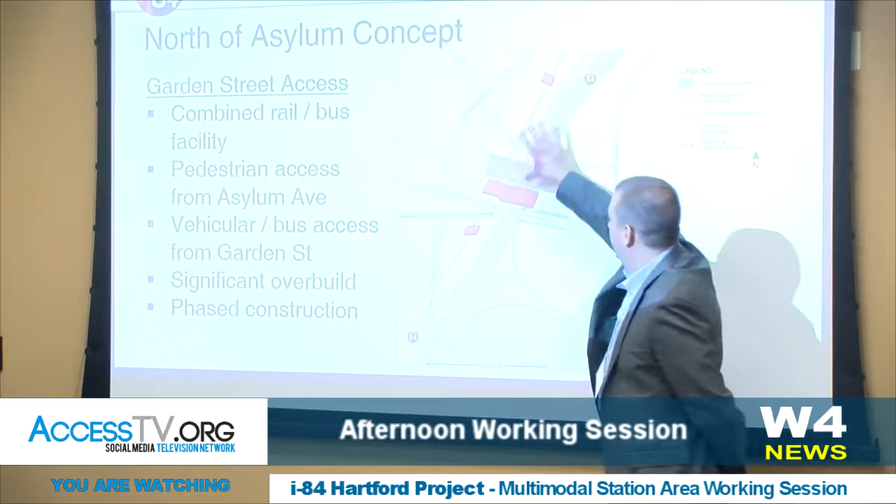Get it as close to downtown as possible, because that's where you're going to get the greatest flow of people. Now, if we move the bus facility to north of Garden, would that achieve the same goals? Yeah, I think so. One of your colleagues showed we could flip the bus station further north.

You're interested in one multimodal station, proximate to the rail and bus, making an east-west connection. Can it be a single building? The blue is only representing the bus bays, and the purple is representing a joint rail and bus waiting room. So yes, it is one building.

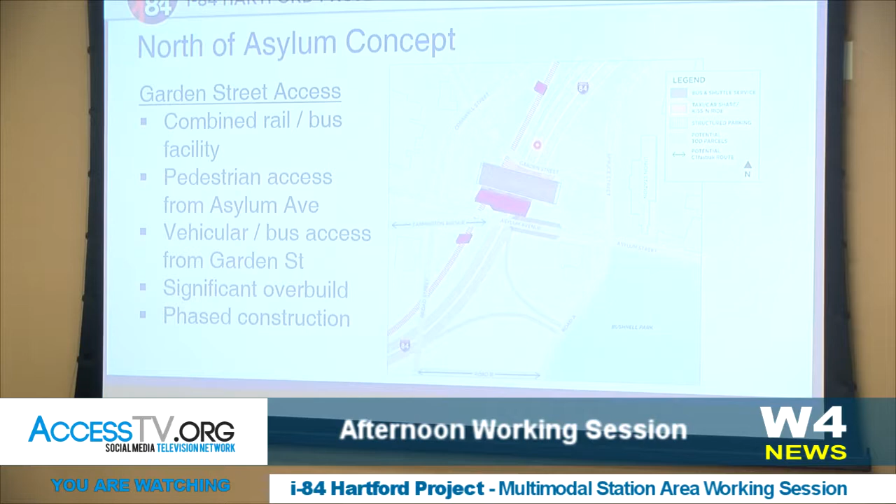I think Bill, you had one? Yes, the Farmington Avenue extension, why can't it run through the Capitol View Transitway, through the orange area down there, almost there? So actually it'd come off this way and go straight down this way. Right, it absolutely can.

It gets into the challenges of the experience of that street and what we're fronting on it at the end of the day, with bus uses versus what mixed-use development might do to a street like that. But it can be done. My concern is these highway ramps, wherever we locate them, are a deterrent for anybody walking from the park or Road A down toward the south. It's a challenge to cross that side of the street because of the nature of those ramps. If you look at how highway ramps interface with urban environments, it's not pleasant crossing 3 or 5 lanes at any time. So the hope was to get an urban street to the north and push the ramps to the south, but we were absolutely looking at the feasibility of switching the two.

And the other one, Bill, going back to the traffic questions someone might weigh in on: in this alternative we've gone through all these steps to get a T-shaped intersection of Broad and Farmington. If we reintroduce a fourth leg into that, I don't know if anyone can speak to whether that would function at this point. We're just trying to make that intersection as simple as possible, so that's probably a question we could only answer another day.

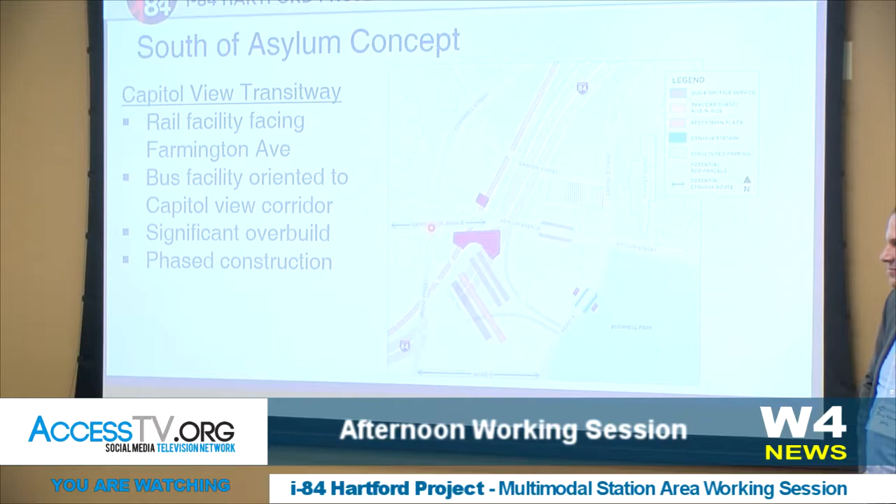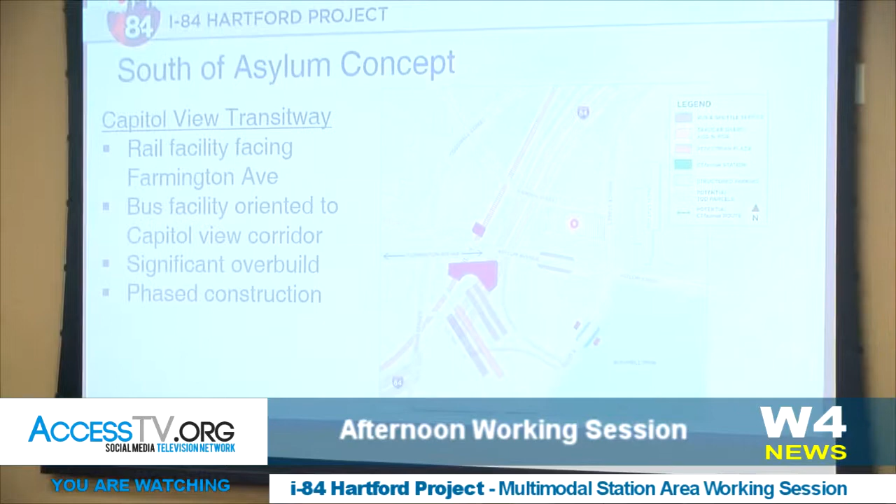Jim? Just from my experience with centers of this type, it's critical that the parking be as close as possible to the station. In this particular alternative, that might not be able to be done. The schematic shows the parking located elsewhere. You're going to get commuters and business people taking the trip into the city, or south, or over to Boston on the new rail service, and they're not going to want to walk that distance to the rail station.

There's a possibility you could incorporate the parking somewhere to the south, maybe as part of a TOD development down there. West of the highway, or just a little west to where it is now, north of Asylum on Garden, but over the tracks, for the parking structure. Yeah, south of Garden, right around there. That would be more proximate.

Tony? I'm going to say exactly the opposite thing from Jim, and I'd ask the experts in the room how transit multimodal stations are built in dense urban environments with successful transit-oriented development. Is the parking put right next to the destination, or is it sometimes put a little further away, so the folks with the wallets have to walk past the things that take their money? Well, go ahead, Bill, you can answer that.

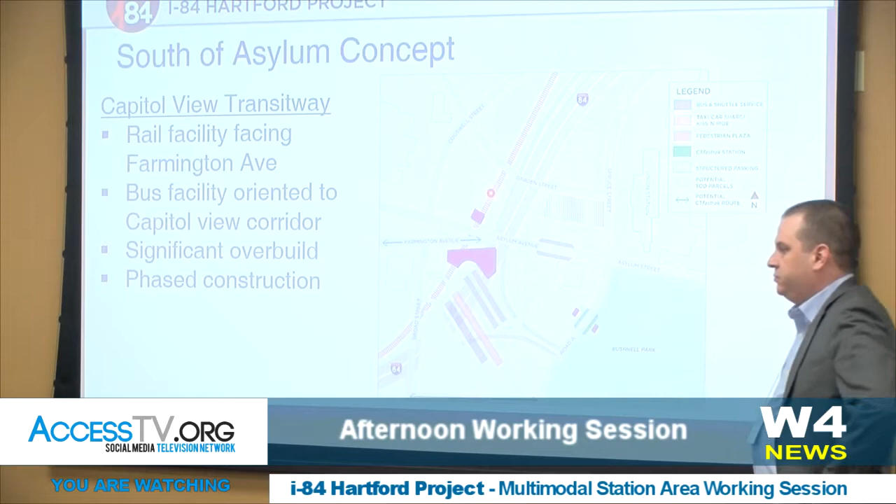I just wanted to add that in developing transit-oriented development, often the most valuable property for redevelopment is publicly owned because of the nature of creating the space for the station. Traditionally, that would become a station with surface parking adjacent to it, which would really be anti-TOD. So there is an opportunity to integrate parking very effectively into this design—maybe you want it proximate, but not necessarily on top.

I think there is a balance you can achieve, where you want people to engage with the public space—whether it's directly adjacent to the station or the street space—so that it activates the corridor. You really want people to be out on the street as much as possible, and we have to think about that as we consider these permutations.

We are anticipating the need for parking primarily for Amtrak riders and some intercity bus riders—riders traveling longer distances than regional rail riders, for example. We'd hope others would come in by bus and be distributed throughout the city. So we're incorporating a footprint of about 500 to 600 parking stalls that would be structured in these concepts.